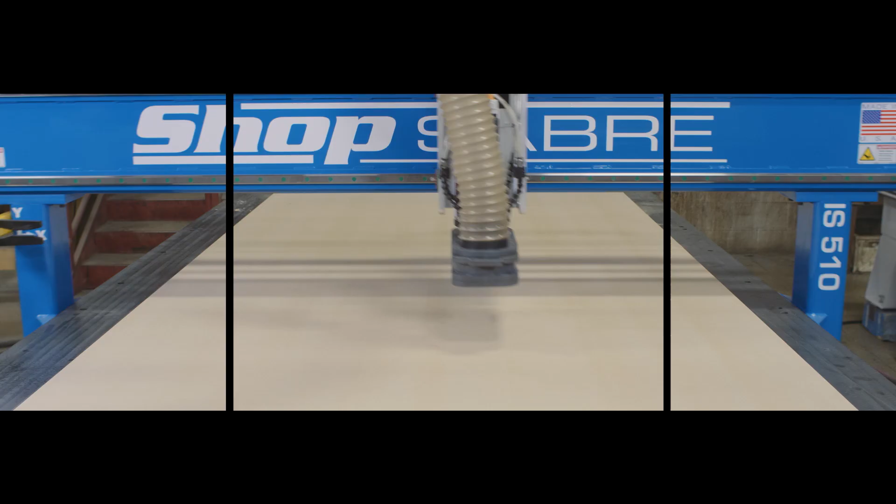Hi everyone, I'm Logan. I'm a technician here at ShopSabre, and we're going to head out to the machine and take a look at our ShopSabre controller.

First thing you'll notice on the controller is that all the axis letters are red. That means that you have to home the machine.

So when you hit the home button, which is located right here, the axes will start moving and it will go to find home. Now in this case, we're not at the machine. This is a demo version, but what you'll end up seeing when it's all done is that it'll move all the way forward, touch its limit switches. If you notice the little dots coming forward, it'll touch off its limit switches, back off to the home location, and it'll end up calling that the home position.

Right there. Now we can see the X, Y, and Z axes are all 0. At this point, you'd be free to drive the machine around, and you can do that using either the arrow keys on the keyboard, page up and page down for the Z-axis, or you can use these arrows on screen here as well.

And you can see if we try to go too far, it's going to give us an error, soft limit high Z, or soft limit low X, or high Y, whichever direction we try to go. So that means we've exceeded the cutting area on the machine. We can't go any farther than that.

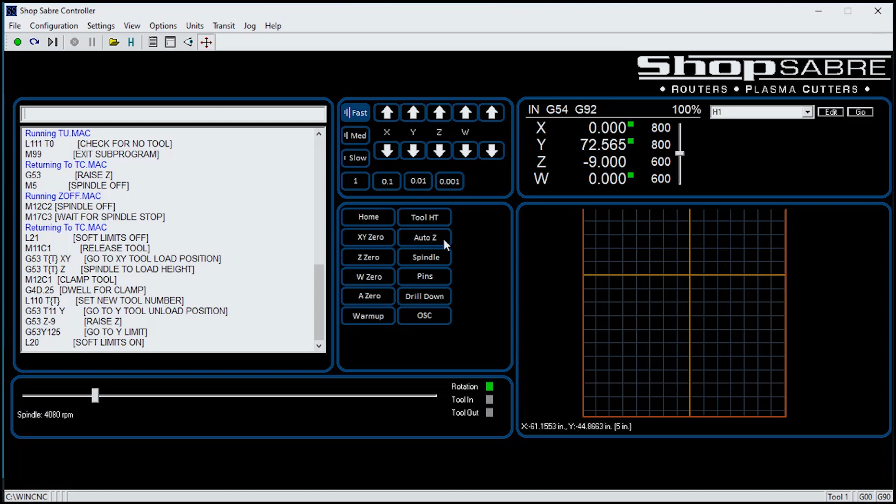The next button is optional, and you'll see it on machines if the material height touchpad has been purchased. If so, there'll be a plug next to the spindle. You plug in your material height touchpad, put it on the surface where you want to set your Z0, either the top of the spoil board or the top of the material, and hit the Auto Z button. The spindle will lift all the way up and then start coming down slowly.

While it's coming down, you'll want to line up that pad underneath the cutting head, whatever blade you want to cut with, whether it's an end mill or a fly cutter—just make sure it's under the cutting surface. It'll touch that twice; the second time will be slower for accuracy, and then it will lift all the way up. At that point, you can remove the material height touchpad, set it aside in a clean, dry place, and proceed with running the machine. Some folks consider it a quicker way of setting your Z0 rather than having to get up close to the machine to make sure your bit's touching the material.

The spindle button is just a way to turn on the spindle. So if you have a tool in there, it's going to spin on. In this case, we don't have a tool in there, so it's not turning on.

The pins button pops up your pop-up reference pins. In this case, we have a boring head, so a drill down button will also drop the first drill down. So when you're setting your W0 over here with the boring head, you'll press that button first, then bring it down and set your W0 with that.

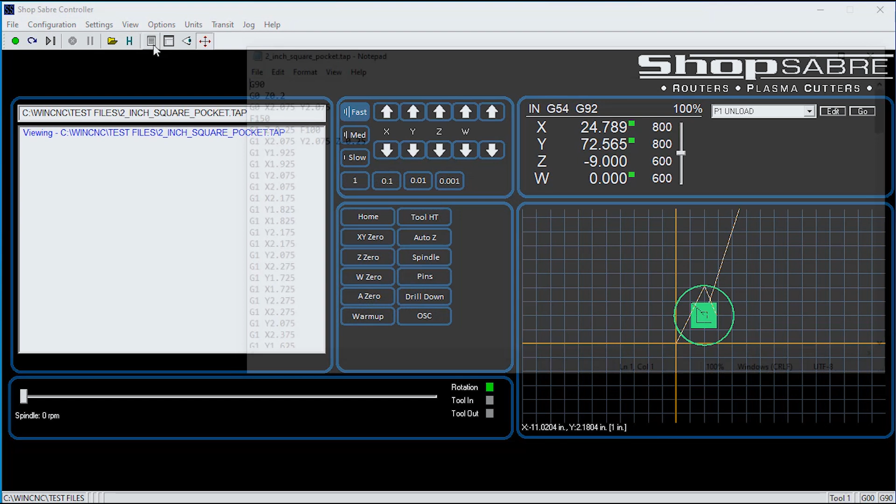The next button is the edit button. That's going to bring up the G code itself. I don't expect you all to be experts on G code by any means, but a couple things you might notice: the F is the feed rate. In this case, it's setting a general feed rate for the machine, but because this is a Z specific line, it's setting 100 as the feed rate for just the Z axis. So if you wanted to go back and change a feed rate quickly, you may not have to go through your camming software, you can just do it here. Or if you wanted to change just how deep it was cutting, you could do that right here as well.

The next button is simulate. It's going to run through the code and see if it finds any errors. In this case, there are no errors. If someone else gave you the code, or you downloaded it online, you can bring that up and check. If there are errors, it will tell you what the first error is and what line it's on. It'll also tell you if you're going to exceed any soft limits.

In this case, we're going to exceed the Z soft limits. So if we were to try and run this, it's going to give us an error, so we know we may have to adjust it. It's also going to give you a basic

estimate of the total time the machine might take. It does not take into account accelerations, decelerations, tool changes, tool measures, things like that. So it's a very approximate number, but it will at least give you a general starting point.

The next button is the view button. Some machines have a button here for soft limits, which you can turn off if you want to exceed them. We don't recommend doing that because you could cause damage to the machine if you go too far. So generally, you should just leave those on.

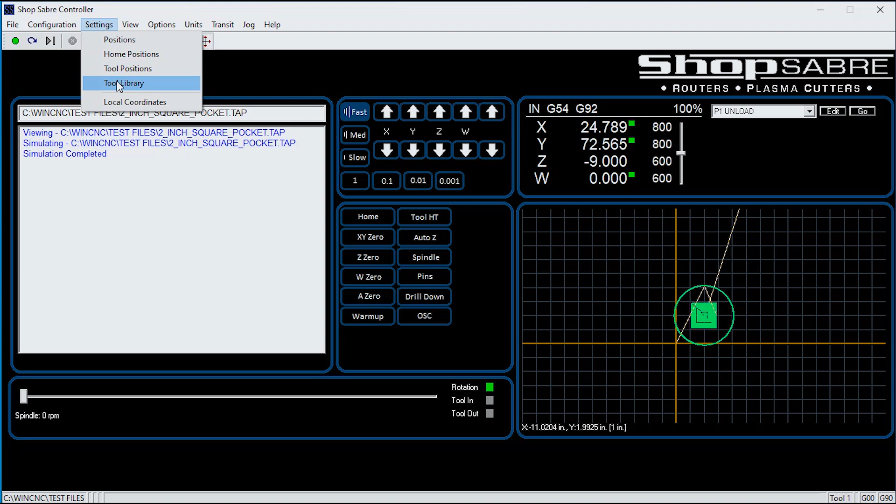Same thing with the settings menu. Generally, there isn't anything that has to be configured in here. If you end up upgrading, adding more tool positions, we might go into this box. In the tool library, you can put the name of which tool is going where, but generally the controller is going to ignore all of this except for a couple of specific situations, except for the tool height. When you do a tool measure, you'll end up getting a value in there for tool height.

Now under the view menu, again, most of this can be ignored. The limits will tell you how much cutting area you have on the machine, and the inputs will bring up all the raw input data for the machine.

If you were to hit a limit switch, you'd see one of these flash, and that's a good way to diagnose if maybe a limit switch needs repair, has a loose wire, or something like that. The toolbars can be made bigger, so if you need glasses, make them a little bit bigger there.

Log time totals - all machines for the last couple of years have this log time totals feature. It will bring up a box that shows how long the machine's been running, what the cutting time and total run time is. You can use that especially if you're keeping track of the greasing schedule.

Every 40 to 60 hours, we generally recommend greasing. The most important thing is that you have at least a thin film of grease on the rails. If you don't, or if you're doing something like foam that you have to keep wiping off the rails, you may want to increase that greasing schedule.

You can find out where the bearings are and how many bearings you have by looking in your owner's manual. The refresh and clear buttons do exactly what they say, so you hit clear and it just clears everything on screen.

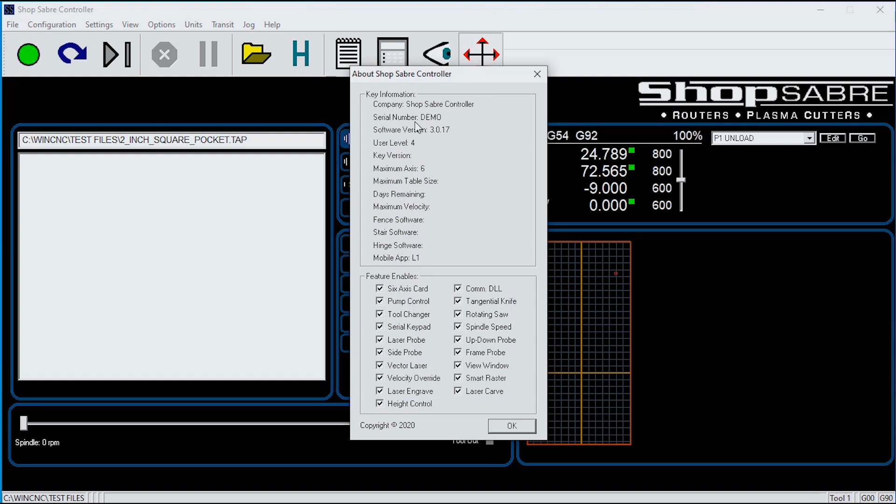First is About. That's going to tell you what software version you're running, what your serial number is, and what options you have enabled for your machine.

Also under the help topics, it's going to bring up the WinCNC manual with everything about how the controller functions. For the most part, you won't need to know most of this, but it does have all the G codes, M codes, and L codes that the machine can understand, as well as a couple pages showing all the shortcut keys for operating the controller. So that's all available through that menu.

Now let's go back inside and discuss drawing in VCarve. So now that we're back in VCarve, we're going to go through setting up a file and doing some basic drawing with included drawing tools.

The first thing we're going to do is click Create a New File. When we do this, the first thing that shows up is the job setup screen. In version 10.5 of VCarve, we have three options: single-sided, double-sided, and rotary. Primarily, we focus on single-sided. Double-sided lets you do a flip part, and of course rotary is a fourth axis.

So let's choose single-sided, and we're going to give a job size setup. This is going to be whatever size sheet you're working on at the moment—so if you have a normal 4x8 sheet, it's usually something like 49 by 97. The thickness is just whatever thickness of material you're working on, in this case 0.75 inches. And you can choose inches or millimeters.

The Z0 position is really critical to match both on VCarve and on the router screen. So the material surface or the material bed is either top of the material or the top of the spoil board, and that's going to be really important later on once we actually get out to cutting. So for now, we're going to choose material surface.

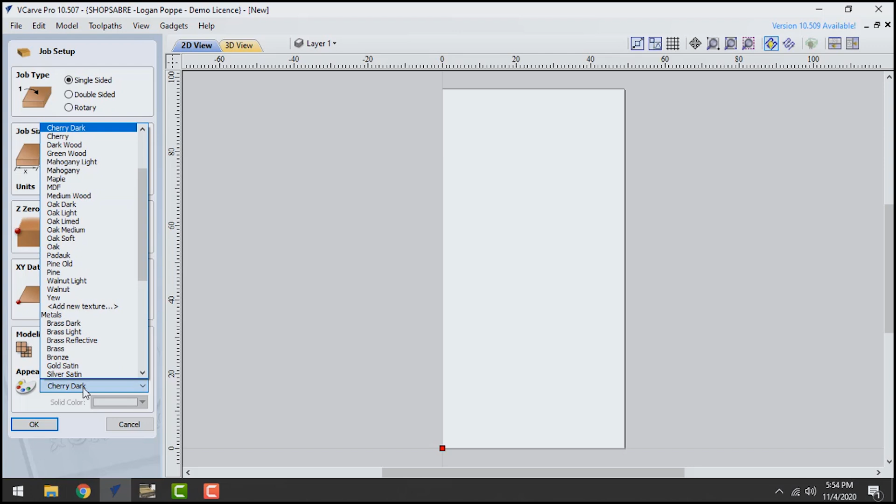Modeling resolution you can usually leave as standard to start with—you can always increase it later. There's also some other options in the toolpath to get even more accuracy if you need to see some really precise details. So in this case we're going to go standard, and the appearance is just for taking screenshots to send out to customers, so we're just going to leave it on cherry right now.

So we click OK, and on the left side are all of our drawing tools. The main things we're going to go through right now are how to create vectors under this Create Vectors tab. So we have Draw Circle, ellipse, rectangles, polygons, and stars. We have polylines, arcs, Bezier curves, and a few other things we'll get into in a minute.

So first we're going to draw a circle. To do this, you can either come over to the screen, click and drag, and you can see it reads out what the diameter is, allowing you to make the circle wherever you want and however big you want. But you can also be accurate if you know exactly where you want it to go. For instance, maybe I want to start at 0,0 and have a diameter of 6 inches.

Now you can see the last one I drew, since I haven't modified it yet, got moved down here, and it just applied the change directly to that circle. So as long as you haven't modified it, you can actually change it, scale it, move it, rotate it through this box.

So now we have our circle here, and we can zoom in using the mouse wheel. When you're zooming in, it's important to zoom in towards the part, so you put your mouse right in the center of the part where you want to zoom in and just zoom right in with the mouse wheel forward. When you're zooming out, you typically want to move your mouse away and zoom out, so you'll be able to see the whole thing. If you zoom in like this and then zoom out right here, it's going to try and focus around the mouse, and you may not see the whole part.

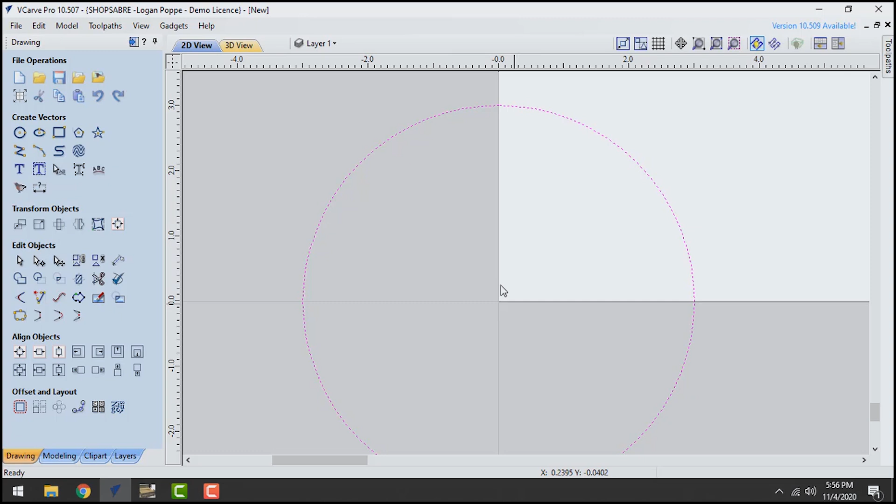Ellipses work very similarly, except that you're going to have an anchor point. In this case, I'm going to start my anchor point down there, and I'm going to go ahead and draw. You're going to give it a width and a height and apply it, and you'll get, just like the circle, an ellipse drawn on screen.

Now, rectangles are very similar as well. You're going to have an anchor point, a starting point, a corner type - I can have a square corner, radius internal, or radius external corners as well, and you can choose the size of that. For external radiused corners, those are what you might commonly call a fillet, and there's another tool to change that to be radiused later on. The internal radius doesn't have a specific tool for it, but if you haven't changed the rectangle or modified it in any way, you can come back into this tool and apply it later, and of course you can set the size and shape of it.

You also have a polygon, so you can come out here and draw different numbers of sides - pentagons, hexagons, etc. The center point, the radius, side length, it's all there, as well as star shapes, and again you can give it how many sides, how many points you want it to have.

Now, to select all these, we can draw a selection box from left to right, and anything that's inside that selection box will be selected. You can see it all goes with a dotted pink line. If I click off of it, it gets deselected. But in VCarve, there's also another way to select things: if you click to the right and drag to the left, anything that's touching will be selected. You don't have to surround the entire shape - right now these three shapes will all be selected even though I didn't surround them. That's a really handy tool, but it's also important to know it's there so you don't select things you didn't mean to select.

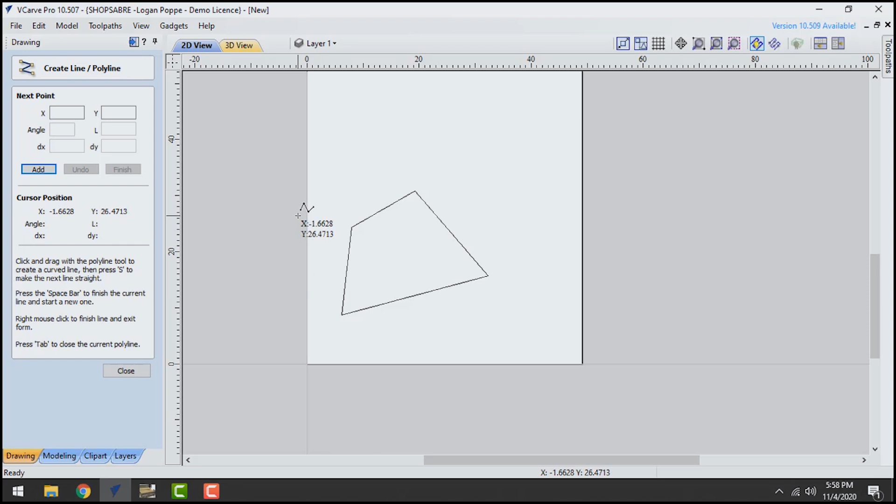But we can also just tell it exactly where we want it to go. So if I wanted to draw a triangle, I could easily do that here. I can click X0, Y0, enter, and it draws a line. Now if I move my mouse over, I've got my start point right there, so now I can draw 10 and 5, and it's going to draw a diagonal. I can bring this back to 0 and 5, and now I can bring it back to 0 and 0, and it's going to complete the shape. You saw it change color, and now I have a triangle.

I can do the same thing with a star shape as well. To get out of a tool, you just right click. So if I'm in a tool here and I'm drawing, I can right click, and it'll stop the tool right there and give me this particular shape.

But I can also give it a start point and change the angle or length as well. So if I knew I had a shape that had to have a diagonal exactly at 30 degrees and it's 5 feet long, or let's say 60 inches, it's going to give me that diagonal at that angle. I don't have to try and figure out and do the math where this endpoint is. And now I could either do up or down from there using dx or dy, or give it specific XY coordinate points. But if I knew I wanted to go from there 5 inches up, I can say dx0, dy5, and it's going to go straight up.

And then I can switch back to using my coordinate points if I know I want that to go to X0 and Y20. And then again, I can go back to X0, Y0, completes the shape, and now I have my finished shape.

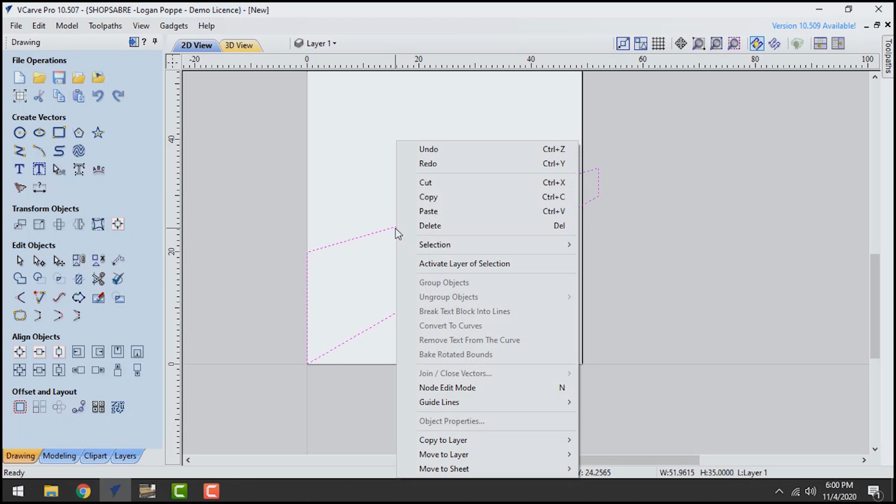I can use the delete key on the keyboard to get rid of a shape. Click that, or I can right click and click delete, and that gets rid of it as well.

Now, one of your biggest friends with VCarve is going to be Control Z. That's going to undo the last operation. So in this case, it brought that back, and it keeps several of them stacked up. So I can do Control Z, Control Z, Control Z, and it can keep going backwards if I want. Again, I can select right to left and delete, and delete.

Another tool that's used a lot is the Draw Arc tool, and this is used a lot, especially if you're tracing parts. There's two different options here. One is through 3 points, so you can click to start, click to end, and then drag out the radius. Or you can do a center start end where you click one point, click another point, and then you have your part of the circle you want to draw. Of course, you can set all these if you know the exact coordinates you want to go through as well.

VCarve does have a vectorizing tool, a tracing tool, and that's right here under Trace Bitmap. But sometimes, as we'll see later, it may not vectorize perfectly. And this is where we may use this Draw Arc to go in there and actually draw something specific to match a little bit closer to the part we're trying to trace.

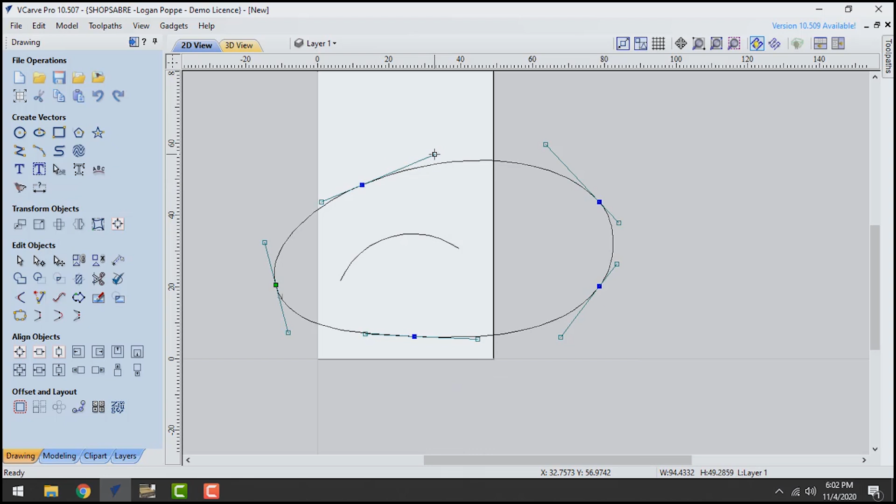We also have Draw Curve, and this is going to be our Bezier curves. So every time we click, we get a handle there, and it creates a curve going around those points. Now, if we right-click to get out of the tool, right-click again, we can go into Node Edit mode, and we're going to have all these different handles that we can drag around. This lets you get really detailed on making some interesting shapes that you couldn't otherwise make.

And while we're still in Node Edit mode, we can right-click and insert a midpoint or another point, or we can change a line to an actual line or an arc rather than just a Bezier curve. This works for all the different shapes as well, whatever tool you're in.

We could also cut the vector. So if we wanted to take a piece out of this, we can right-click twice to get out of the tool. And now when we select it, we see that just that little section turns pink. So I delete this, and now I have an open contour. Let's get rid of that.

The next tool is a vector texture tool, which we'll use here in just a minute when we start building things. We also have a Draw Text tool, where I can just type in whatever I want to say.

I can choose my font, and these are going to be all the fonts that are in your Windows Fonts folder. So if you want to add more, just find the Windows Fonts folder on your hard drive, drop them in there. Next time you open up VCarve, they'll show up. I would recommend using a true type font, and that's what you're going to see right here with these little TTs. Right here we have the letter O—this means it's an open type font, and they may or may not show up properly. So ideally, always try and find a true type font if you're adding new ones. And you can also give it the text height.

Now the text height is, when someone's making a font, the total blank area that they have to draw with. So for instance, 8 inches for text height is going to be maybe where this H or these L's are, but the E isn't going to be 8 inches tall. That's the blank area it has to work with for a particular character. So keep that in mind as well.

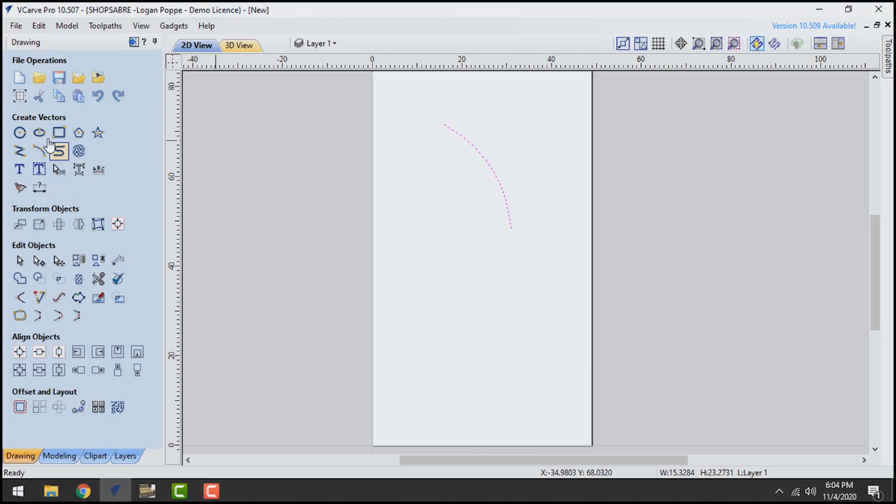There's a couple more text tools, which again we'll get into in a little bit here once we start drawing. There's also text on a curve, and it doesn't necessarily have to be an arc. So let's bring this back out here and say I wanted to put my name on there. I can choose text on a curve and select both of these.

In this case it's a little bit too long, so we can shrink it down, scale that text down, and as soon as we do that it shows up on this curve. Now we have the options to move it out onto or on the other side of the curve. We can flip the text around, change it to be left aligned, middle, right aligned, or aligned to curve, or keep them vertical, which will then align them with the vertical axis here, but still follow that curve.

And if I go back, of course, it gives me that error, so then it automatically flips back to scale text to fit the curve. And it doesn't just have to be this arc. I can have any kind of crazy winding shape that I want, or a rectangle box. It will make it follow that shape.

All right, now let's go ahead and actually draw something. So we're going to first draw a rectangle. Let's say we want to make a plaque with our name on it. We choose rectangle, and we're going to start with an anchor point at the lower left corner at 0, 0. It's the best practice to always start at this lower left corner.

If you have a particular shaped remnant and you want to put it in a specific location, that's maybe when you would change it. But for now, we're just going to start at 0, 0. And I want these internal radius corners so it looks like a really sharp, nice looking plaque. For size, let's say we're going to make this 15 inches by 10 inches, so we put in 15 by 10, say create, and it puts our plaque down there. That looks pretty nice.

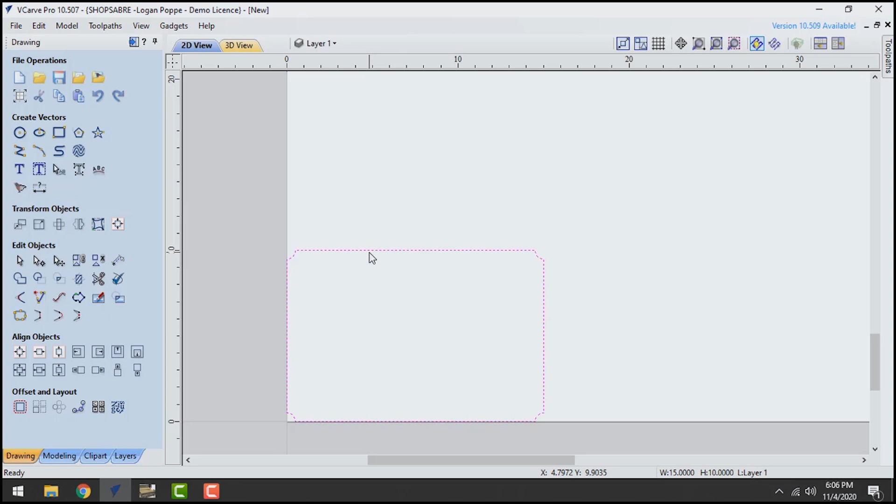One, I could go back in here and draw another rectangle with a slightly different size radius corners and a slightly different size and anchor point, but that would be a little bit more complicated. And like anything you do in VCarve, you're going to find that there are multiple different options. I could also do a copy and paste. So if I do a Control-C on the keyboard and a Control-V, you see now these lines got darker. That's because it pasted a second object right here.

So I could go into the Scale tool, set selected size, anchor point of center so that it collapses around it, and change this size to be slightly less, say 14.5. But as you notice, it scales both the width and height together. So instead, what I'd really want would be to uncheck Link XY, and now when I change one of them, it's not going to change the other. In this case I can make it 14 by 9, hit apply, makes this smaller, and I could realign it with the center right here. But as you can see, this isn't quite right.

Maybe that's the look I'm going for, but in this case I want something that changes that curve as well. So the easiest tool in this case is your offset tool, way down here at the bottom left. I'm going to offset inwards — I have the option to go outwards or both — and I want to inset by half an inch. And I don't want to delete the original because I want to keep that as my outside border.

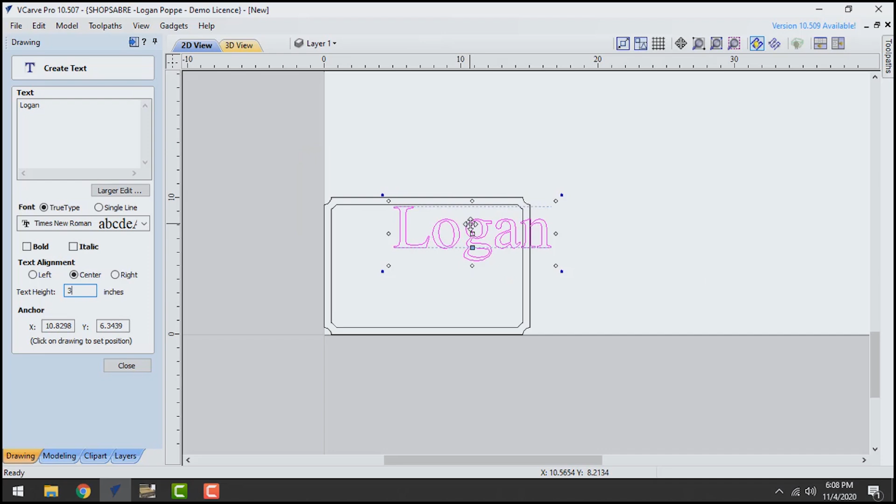One way of doing it, again there's always multiple ways, is I can come in here and change the text size, get it to fit, and drag it into the center. VCarve, if you have these snapping tools on up here, will tend to allow you to snap to things. So in this case, snapping to the center of the box brings it right there. But you can also see that the G is off a little bit, so I may want to bump it down, and I can use the arrow keys just to bump it down a little bit.

In VCarve, the closer you zoom in, the less that bump is going to affect it. When I zoom way out, it's going to create much bigger jumps. If I hold the Control or Shift key, you can see those jumps change size significantly, and those are always going to be the same size regardless of the zoom level, unlike the regular bumps.

But there's another way to do this as well, and it's right here under Transform Objects. We can go to Align Selected Objects, and you have all the different tools. I can align to a specific shape or to the center of the sheet. And all the way down here on the bottom, it says Show Common Tools on the Drawing tab. Now when I click on that, it brings out all those tools right down here, so it's easier to use.

So now I can just come out here, select the two shapes that I want, and click Align. And you see, because of the order I selected these, it moved the name right to the center. If I had selected in the opposite order, it would move the box to the name.

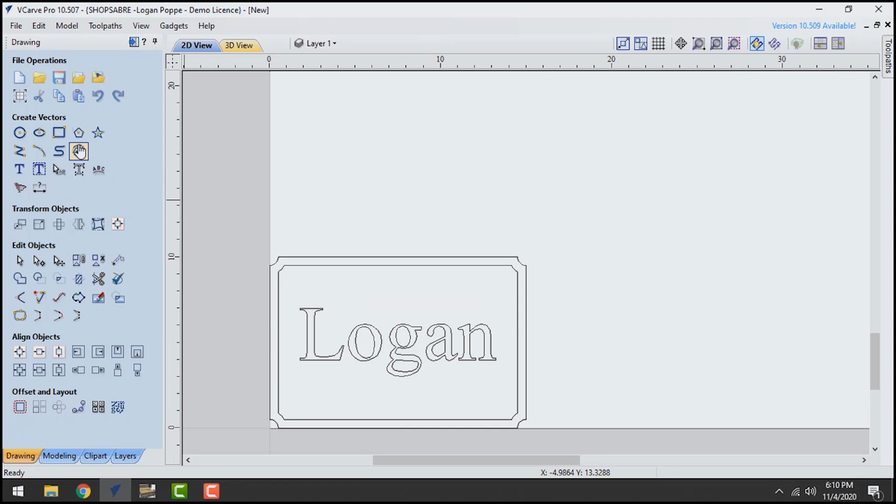So now that that's done, I want to put some kind of fancy texture in here, and that's where I'm going to use this texture toolpath, vector texture. So I'm going to click the inside inside rectangle, and I'm going to choose my angle, my spacing, which can have some variation to it, wave parameters, how much variation there is with the noise, and hit preview.

And it's going to keep these lines inside. You'll be able to see they go right up to the edge, but they go on top of the name because I didn't select the name. In this case, if I'm doing something like V-carving the name down into the plaque, that's probably how I want it. I want the bit to spend the most time cutting the material. It's going to save me time overall. And then I'll carve this out after that.

However, if I wanted to keep it in between the name and the rectangle, I can select both of them, do this, and hit preview, and it's going to keep that texture outside of the name. Now in this case, I really just want it to be around there, so I'm going to click OK, and it's going to fill that in.

And perhaps I want a couple of drill holes as well. I'm going to choose draw a circle and choose a 1/4 inch diameter or whatever size drill hole I want in order to hang the plaque. And I'm going to choose where I want those to be. So I could go out there and just click a spot, or I could click, say, 2 and 9. And now I have my one drill hole.

Now, since this is a relatively easy shape, I could just go do the math and say, well, we're 15 minus 2 would be 13. And we have another circle right there. But if it was a more complicated shape or I didn't necessarily have the coordinates down, there's another way to do it as well, which is mirroring.

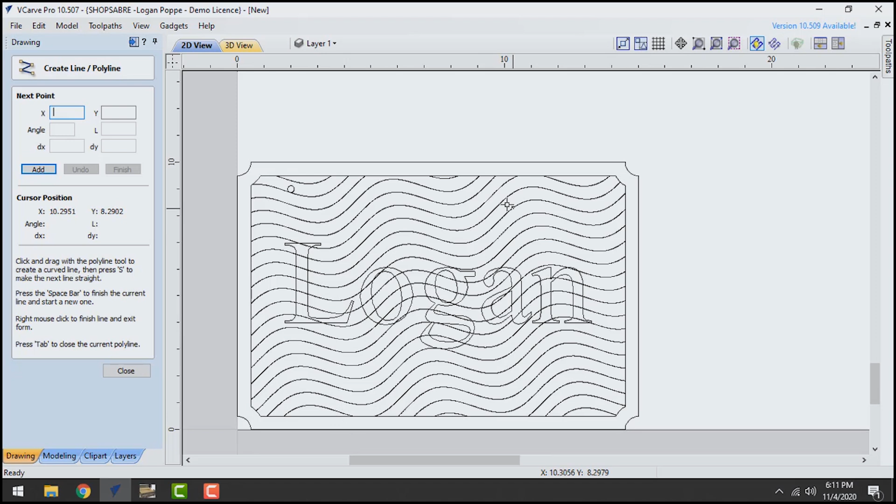So one way I can do it is I can draw a line straight down the center of my part. I can take those two pieces, come into the mirror tool under Transform Objects, make sure that Create a Mirrored Copy is checked, so there's a second one and it doesn't just move it. And then I can click Flip Right, and now we see we have a second copy right over there that's exactly mirrored from this one.

That can come in really handy when you start doing more complex shapes. And then I can just select the line and delete it, and we're good to go.

Now I'm going to start putting toolpaths on here, because of course I want to actually cut this. So we're going to come all the way over to the right side and get our toolpath menu. And I like to hit this little auto hide button, this pin icon. It keeps it out so it doesn't keep moving around on me.

So now I want to think about the order that I want to cut this. Of course, the very last thing I want to do is cut the shape out. But in between there, I want to create that pocket. I want to cut the name out, put this texture on, and then also drill those holes.

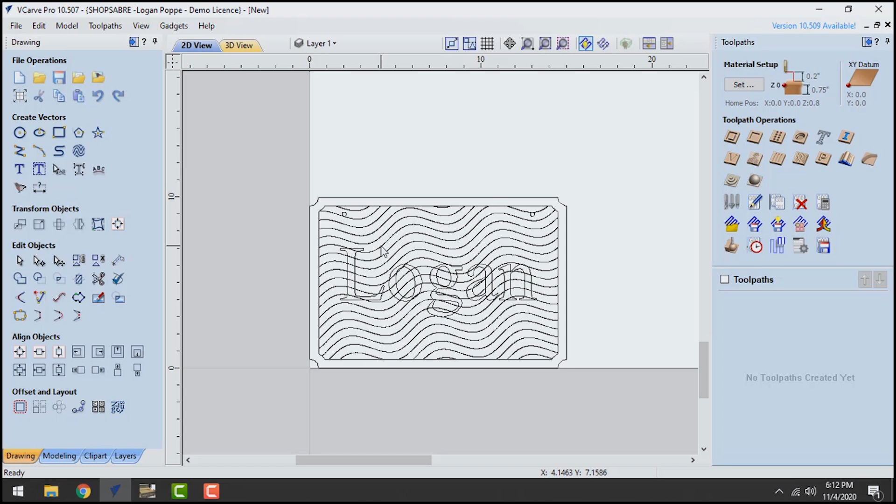So the first thing I'm going to want to do is cut that pocket down in there. I'm going to come over here to the second option, which is Pocket Toolpath. In this case, my start depth is going to be 0, and normally, for most of your toolpaths, it will be 0. My cut depth is how deep I want it to go—in this case, a 1/4 inch. And I'm going to choose my tool.

These will all be selected when you first set up VCarve. You're going to come in here and in your tool database, set up all your tools. In this case, we have a number of them already set up, so I'm going to choose my tool, and all these parameters should be set up. But if I wanted to change them only for this toolpath, I can click the Edit button and fill in all this data here. So say instead of 200 inches a minute, I only wanted to do 150 inches a minute for this particular run—I could do that, and it won't change what's in my tool database.

Then I'm going to choose which type of pocket I'm going to do, either offset or raster. Offset's more like a spiral where it will start on the inside and work its way outside, whereas raster is going to go back and forth, and generally you're going to choose the longest direction when you're doing that. So in this case, I'm going to choose 0 degrees, which is left to right, whereas 90 would be lengthwise down the machine. And I'm also going to do a last profile pass, and this is going to come around the outside and do a cleanup when it's all done.

Now the next option is ramp all your plunge moves. And you're going to do this on any down cuts or compression bits. It's absolutely critical that those bits are ramped in, not plunged, because they will burn the material. They have the potential to start a fire, or at the very least burn out the bit early from the excess heat. I tend to ramp in at least twice the distance I'm ramping down. So in this case, I'm ramping down a 1/4 inch, I'd want to do at least a 1/2 inch. I'm going to choose 1 inch because we've got plenty of space here, so it's not going to hurt anything.

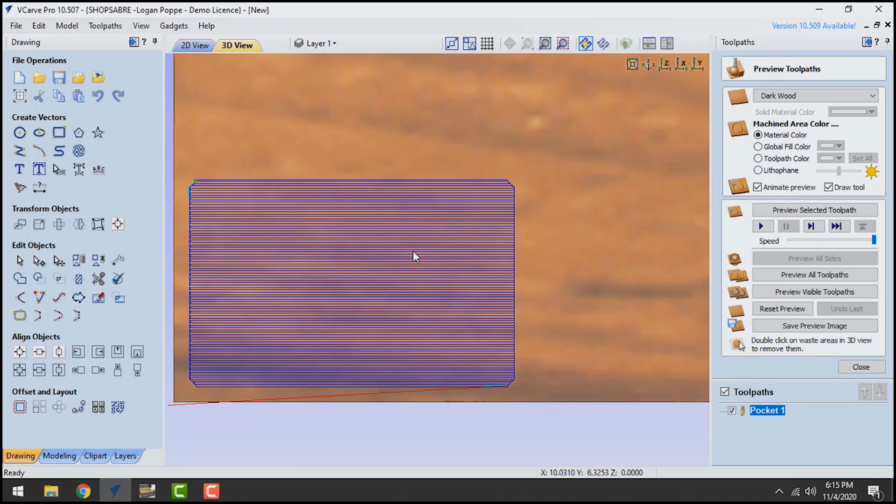Now back in the 2D view, I'm going to turn off that toolpath so I can see everything clearly again. And the next thing I wanted to do is do these texture lines. I'm going to come back up here to Profile, and I'm going to configure this.

This would be one of the few cases where you do have a start depth, because we already pocketed out this area. So we want to start a 1/4 inch down, the same depth we pocketed out. But our cut depth then is going to go down from there—this is not a total depth down, this is only the amount you're going down below the start depth. So in this case, I only want to go down a small amount, like 40 thousandths of an inch.

I'm going to choose my tool, same as before—in this case, I'm going to choose the V-bit. And one pass, because it's not going very deep. I'm also going to choose on the line. Outside and inside will offset the bit left or right, but in this case, I want it to actually follow directly on this path.

For this particular toolpath, we don't have to worry about any of these other options, and we'll come back to those later.

So now we have that toolpath, and we can go back up to 2D view, deselect our toolpath, and now we can cut our name, come back to close.

In this case, we're going to do a V carving. Now, a V-bit can be used in two different ways. You can do a profile just like what we did there, or you can do a V carving. The V carving is going to make the lines of any closed shape come to a V groove, a V shape. So if you have a 90-degree V-bit and you have a box separated by, say, 6 inches, it's going to try and make that a 3-inch deep cut to make those two lines hit a V.

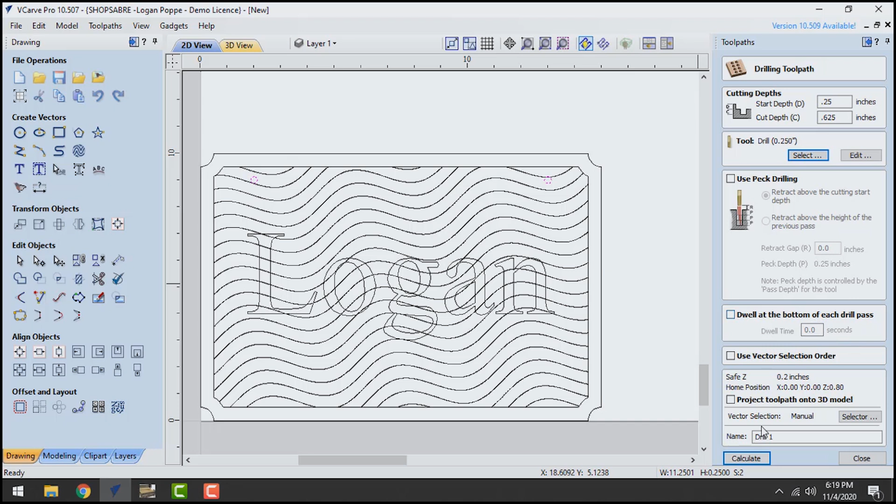And dwell at the bottom of the pass will allow the drill to sit and spin at the very bottom, just to make sure that it's all the way through in clearing the hole. We hit calculate. Now in this case, it's telling us that we're going to go all the way through, which is fine.

The next thing I want to do is put a chamfer toolpath around the outside. But there's a couple different options. With version 10.5, they actually have a chamfer toolpath specifically. But because we have a big enough V-bit here, we don't have to use that. We can actually just plunge that V-bit and run it around the perimeter.

So we can come in here and profile. And in this case, our start depth is 0. We're going to start at the very top. And we're only going to go down about 1/4 inch. And again, we're going to choose our tool. And we're going to check on the line.

In this case, it was already set up. It remembers the last settings that we used. And now we just get a profile line right around there.

Come back and do one more, and this time we're actually going to cut it out. So we still have our outside selected. We're going to choose Profile Toolpath, only this time we're going to be cutting all the way through.

And if you have vacuum hold down, you may be able to get a very accurate number here. If your material is 0.75, you may be able to go 0.75 or 0.76 or somewhere in between. If you don't have vacuum hold down, if you're just using clamps, a lot of times the material will have a bow to it. So you may end up going with something like 0.77, 0.78. It's going to depend on your material, of course.

For the tool, in this case, we're going to choose our compression bit. We're going to choose outside so that it offsets that tool. We're going to ramp it in, and in this case at least 1.5 inches. We've got plenty of space, so 2 inches is fine.

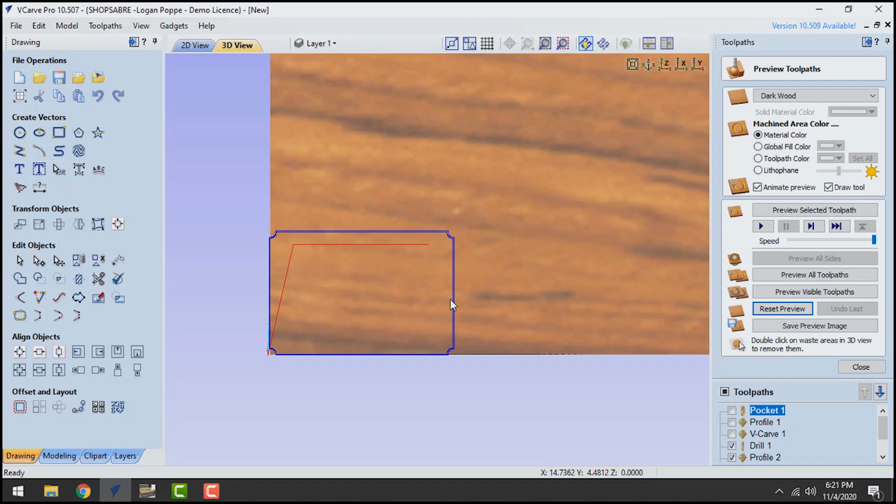We're going to calculate, and again, we're cutting all the way through. Now we can preview it. There's a few different preview options. We have preview selected, which is whatever is highlighted in blue. Preview all toolpaths is whatever's in this list. Preview visible is whatever's checkmarked. And of course reset, if we previewed it once and want to clear it all out to make a change, we can do that. In this case, I'm going to preview all.

Once it's previewed, we can double click on the material, anything that's left over, and it'll get rid of it. Same thing down here. So now here's our finished plaque. We can left click and tilt it to see it at an angle.

You can see in here this is because we didn't use a clearance tool, so we're trying to clear out this area with our little V-bit. So if we have a 1/8 inch bit or a 1/16 inch bit, we may come back and clear that up. That'll probably save us some time as well.

But we can also see that around the outside here, our V-bit's cutting into the edge of our border, and we don't really want that, or at least I don't in this case. So what I'm going to do is come back here and offset this. I could do a scale object size, just like we did before, or I could offset this border again and do another toolpath on there.

In this case, I'm just going to offset this. So I'm going to change the set selected size, again uncheck linked XY, and move it in a little bit depending upon the size of your bit. If you have a 1/4 inch bit, you may not have to move it as far. Let's say in this case I do 13.5 and 8.5. We want to make sure we're on the center so the whole vector texture stays centered.

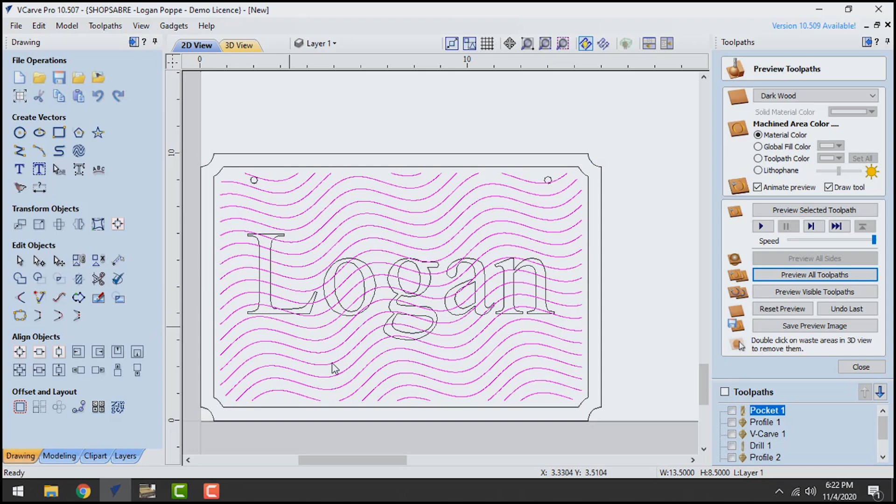You can see it offset it from the side. We can come back here, right click, and choose recalculate all. It goes through, yep, we're cutting all the way through. All toolpaths successfully recalculated. Come back to the 3D view, reset the preview, preview all toolpaths again, and we'll see if that got it away far enough.

And that looks pretty good. There is a little bit left here, so we may decide to come back and tinker with this a little more, bring this in maybe another 1/8 of an inch on each side. Overall, that's looking pretty good.

So in order to get this out to the machine, we're going to come back over here, close, and click Save Toolpath. Now in this case it will depend on what type of machine you have and what options you have with your machine as to exactly how you're going to proceed. If you want to put all visible toolpaths to a single file, you'll want to have either a tool changer, automatic tool changer machine, or have all of those toolpaths be the same tool.

In this case, we have different tools, but we also have a tool changer, so we can just select all of the tools. What it's telling us is that both of these toolpaths are using the same number tool, but the actual tool is different. So what we can do is come back to Profile or Drill, Edit, and change this tool number.

Now, of course, once you set this all up for what's on your machine, they should all be in the correct order and you won't get that error. But now that we fixed that, we don't have any more errors here. We just have to remember now to move our drill to the tool we just changed it to. We can click Save, and we can come in here to today's date.

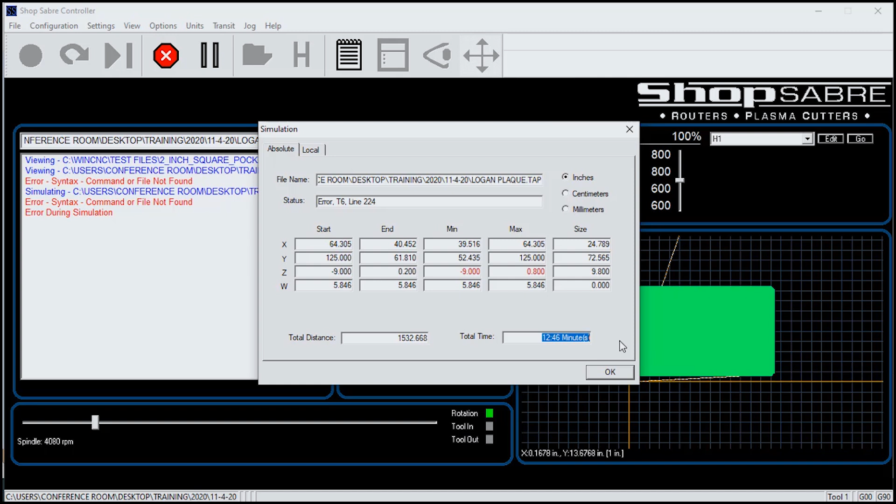Keep in mind this does not include accelerations or decelerations, so if we're doing a lot of little details, it's probably going to take a little bit longer than this. But that gives us a good estimate for what it's going to be.

If we don't have a tool changer, we're going to save these separately and run them successively, one file after the next. So we can click a single one, and we're going to choose our different post-processor. Instead of ATC speed, we're going to choose our M5 speed.

We're going to click Save, and we can give it the name. In this case, I would call it Logan Plaque 1 and 0.25 end mill. What this is going to do is keep it in order when I look at it in the file folder. We're going to have toolpaths 1, 2, 3, 4, 5, etc.

And we're going to see which tool it is, so if I come back to this six months from now, it'll actually tell me which tool it is. But VCarve 10.5 has another function where you can say save visible toolpaths to multiple files and group where possible. So because these two toolpaths right here are both using a V-bit, it will automatically put those two together.

So if I select all the toolpaths and say Save Toolpath, and click Save, now in this folder we have exactly what we're going to do individually. So Logan plaque 1, 2, 3, 4, 5, and 6, and it combined 2 and 3 into 1. The only thing is it doesn't put what the tool is, but you can also change the name right here.

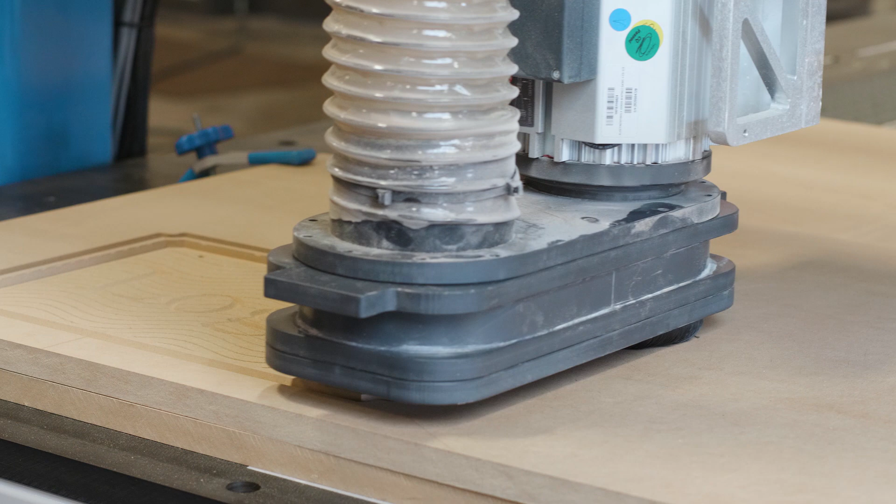Now that we've made a plaque, let's see if we can nest that out if we want to make multiple plaques. So we're going to go back to the 2D view, and there's several ways that we could put this across the whole sheet. One way, we can just select all of the lines that we have drawn, deselect our toolpath so we can see it, and we can do an array copy.

And what that's going to do is give us a certain number of rows and columns of whatever we've selected. So in this case, let's say we want to make 3 rows and 3 columns. We just want 9 of these. And we have to choose, do we want it offset or gap?

A gap would be how much space is left between the two plaques, and an offset would be from, say, left edge to left edge. So we're going to go with a gap. And generally, the gap between parts you want to be more than twice the diameter of your tool.

The reason being that you want your tool to be able to grip on the material on both sides so you don't get excessive vibration. So if we're using a 1/4 inch tool, we would want something more than a 1/2 inch wide.

So in this case, let's say it's 0.51 and 0.51. And all we have to do is say copy. In this case, the computer is going to go through, and that happened pretty quickly. It replicates all of the lines that we drew out here.

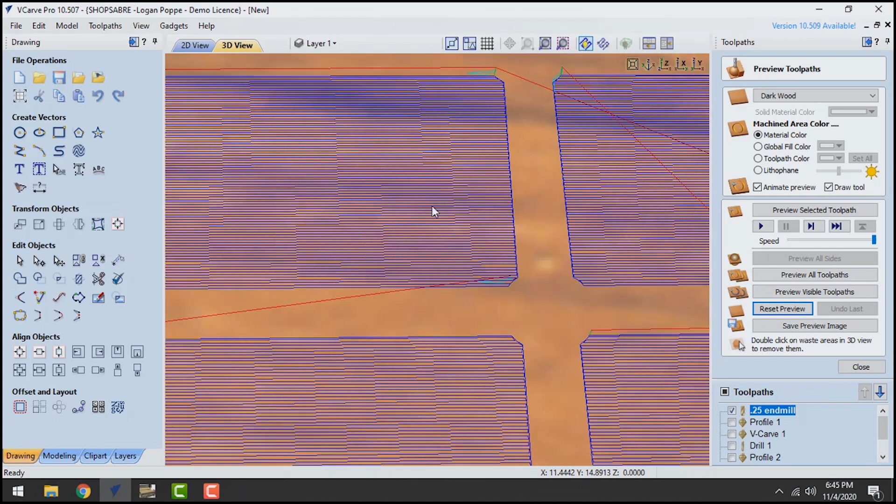We can reset the preview, and they're all right here. We could go through and do that with all of these different options. So that's one way of nesting, just creating a simple array of parts that fit on the sheet.

However, that is a lot of work to have to go back through and grab each individual vector and re-toolpath it. So there's an easier way to do it. What we can do is come back in here. In fact, let's delete all these parts. Computer's just thinking on it here.

There we go. We'll grab all these toolpaths again, and we're going to come back up here to change this to be only this one rectangle, since we got rid of the other ones.

There's an option for array copy toolpath, so all of the selected toolpaths will be arrayed out just like we did with array copy vectors, except it's only putting out the toolpaths rather than the entire vector set. It makes it faster—you saw the computer calculate a bit faster—and I don't have to go through and select every one over and over. It makes it a lot easier.

And of course, we can preview all of these, and we'll get our whole sheet there.

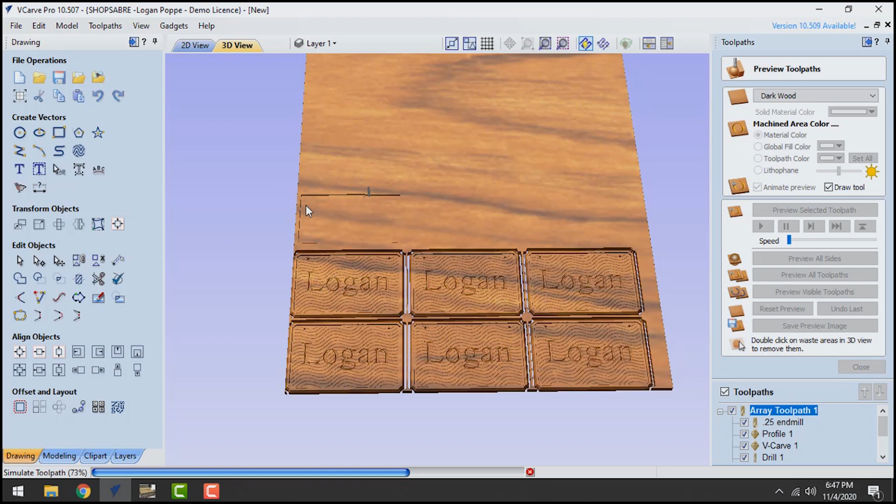The speed this goes at depends on two factors. One, this speed slider bar right here—if we bring it all the way to the left, it's going to go at real-time speed, so you'll see it slowly move back and forth if you wanted to watch that and make sure it's going the right speed. But we can also speed it up, and the maximum speed will depend on the computer processor you're running this on. The faster your processor, the faster this will preview.

The other factor is the preview simulation quality, and in this case I have it set on maximum, so this is going as slow as it possibly can. We can bring that back down to standard and preview all, and it goes much faster, as you can see. We'd only do that if we don't necessarily care about seeing all the detail—it's much more fuzzy because it's not trying to render all that little detail. So now that we know it works, we can speed everything up quite a bit.

So that's one way of nesting all the parts. However, some parts aren't necessarily as simple as a rectangle, and there's another option here for nesting. What this will try to do is rotate all the parts to fit them onto your sheet. You can give it a different rotation step angle, the gaps between the material, and how many copies you want, and it will try to put all of those onto a single sheet.

Now in this case, nesting won't do much because it's just a simple rectangle.

So before we move on, let's save this. We already saved the toolpaths. We're going to come back up to File, Save As, and give it the name Logan Plaque. This is actually saving the VCarve file—if we wanted to come back and make changes later, we'd have to have this file, because the G-code file can only be read by the machine.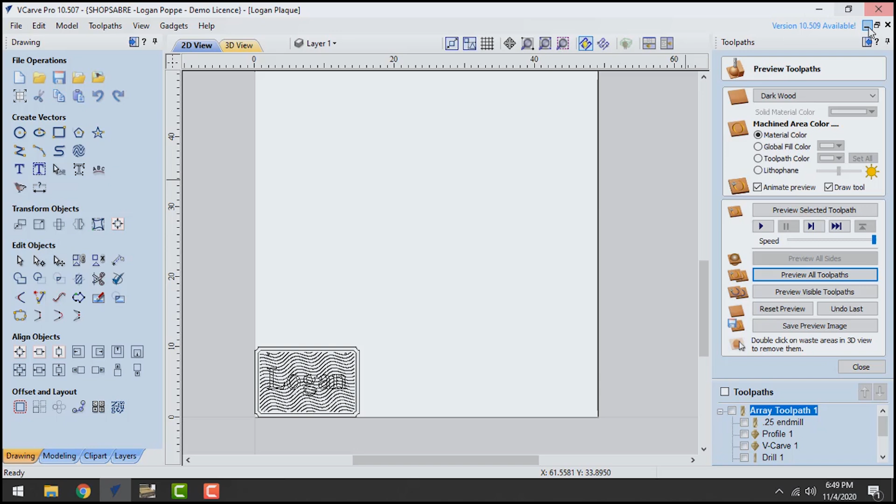So let's start a new file and just make an interesting little shape, something that's going to nest a little bit easier. I'm just going to draw a little circle there and maybe a couple little points, and let's even say just a rectangle—something that's going to give us an interesting shape.

We can use this trim tool, as you saw me grab right here, and it takes away any extra pieces that are intersecting. So when I grab trim, come back up here, click the part—in version 10, you can actually just click and drag, and anything you touch will go away. Again, Control Z is your friend—so undo that, and there we go.

Now this is all one part. Of course, we didn't do this little part here, so let's click that. Right here there's an option for rejoin trimmed sections. When I click this, it puts all of this together in a single shape. When I click on any part of it, the entire thing is selected.

If I didn't have that checked, I would get individual pieces that I would then have to check and join together. So let's say I did that, let's say I uncheck this. Now I've got two separate pieces here. How do I get them together?

Well, there's a tool called Join right here under Edit Objects. So I can select everything, Join, and in this case I'm seeing two open vectors, so two non-closed shapes. When it's all done, it's going to create a closed shape. Now in this case, because they're touching, we can keep this tolerance very low.

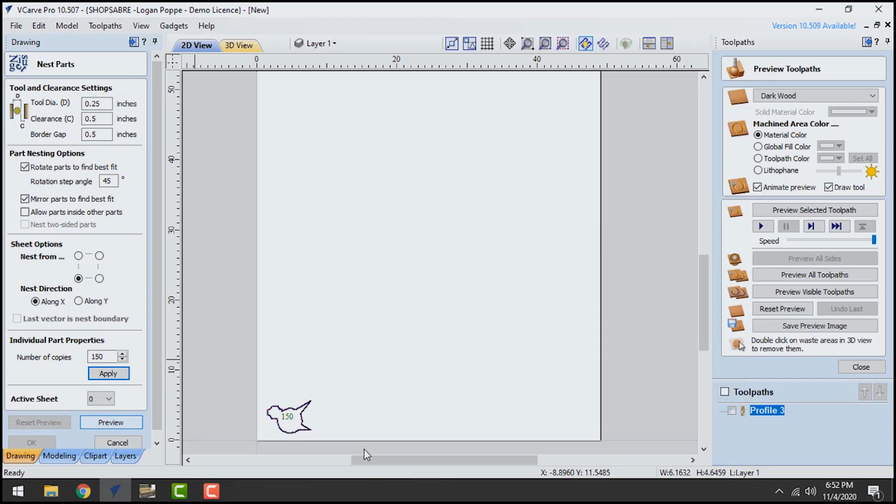Let's just say 150 copies. Now it puts a little 150 there, and when I hit preview, it's going to fit them all into a sheet if it can. In this case, it can't. We have an extra sheet.

If this was the exact number I wanted, exactly 150, I can double click on sheet 2, I can put my toolpaths on here, and then I'm good to go.

However, if I didn't want that many, I just wanted as many as I could fit on a sheet, what I can do is try to get this number a little bit closer. So I can reset, change this down to say 125, hit apply. Those all fit on one sheet, but I might be able to fit a few more.

So let's say 135, preview. And now this gives me 3 extra here. So now I can try changing my rotation step angle. Let's go down to say 22 degrees, reset, preview, but 22 actually got worse, there's more parts left over. So let's say I go down to 10 degrees, preview, and it's somewhere in between.

And let's try 3. And now 4, we're close. I can go back down to 2 and preview, and that went back up to 5. So there's no perfect number to start with. In this case, 45 got us the best, we only have 3 left over.

So I can come back in here, change this down to 132, preview. Yes, I want to apply that. And now I've got 1 full sheet of nested parts.

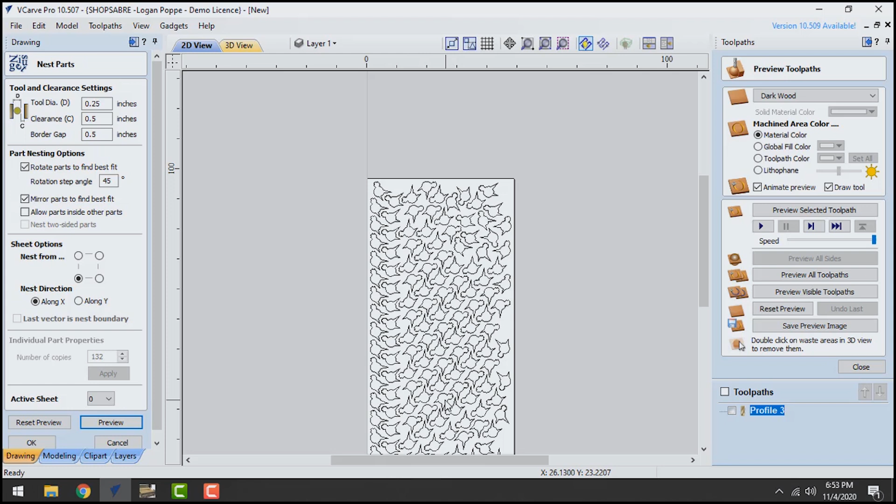Now in this case, this is a relatively simple shape, so I could simply go into my toolpath, do a Control A. Control A is select all. There we go, now I've selected everything and I can hit calculate. We're cutting all the way through. Now we have a nested sheet, and I can preview it and get rid of the extra, and there's all my parts.

Let's say I wanted to send this to a customer. There's a save preview image right here. If I click that, it gives me an option to save it as a JPEG or a bitmap or PNG. So I can choose one and give it a name, and now I could send that file to a customer so they could approve it.

And I can also change what color the material is or what grain it has, whether it's metal or plastic or wood. That's all in that option right there.

Let's say if we had a more complicated part, something where maybe we couldn't just grab it all at once. So let's put a few different options in here. Let's say we have some kind of shape there and we have some other shape over here, and we have different tool paths for each of those shapes. We're going to grab, say, a pocket tool path, and go down 1/4 inch in there. Then we're going to come back here and do a V-carving in this.

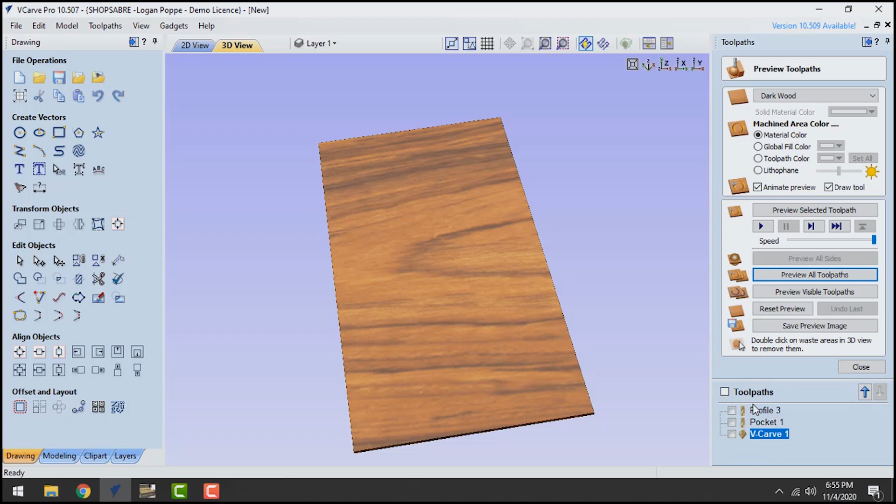We're going to reset the preview, preview all. In this case, we didn't recalculate our first tool path, so we're going to recalculate all. One or more errors have occurred, and what that means is we didn't select this option after we undid everything. So we're going to come back here, select this, calculate, and now we can preview all. We're back to our single shape.

All right, so now if we wanted to nest this, we could certainly do it the same way. We already figured out those parameters. We're going to grab all of these, and this would be one of the few cases we're going to group something. We're going to group it all, and that's going to keep all of the pieces together when it lays it out on the sheet, rather than trying to fit these individual parts inside of each other.

So we're going to nest it. We already have our number from before. Apply, preview, and they all fit on the sheet. But if I wanted to toolpath these, I would have to go through and select all of just this one, and that's not going to work out very well. So there is an easier way.

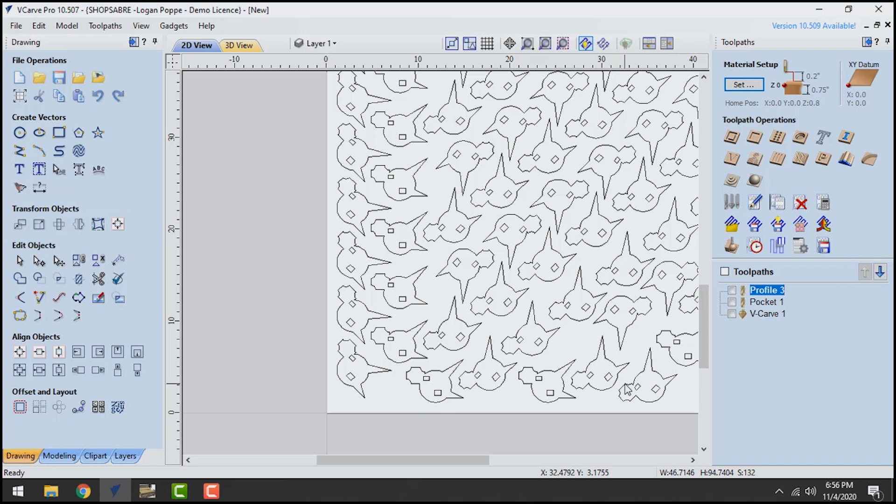First, though, I'm going to ungroup these, because if you notice, when I come in here, none of these are selected. That's because they're grouped, so they're not considered to be on any particular layer. So I can select everything, ungroup, and what I'm going to do now is actually undo everything before I nest it. Again, Control-Z is undo.

And I'm going to change the layers that these are on. So I'm going to do move to layer, new layer, and I'm just going to call this the border layer. Okay, and I'm going to choose this and say move to layer, new layer. I'm going to call this the VCarve layer. And up at the top here is your layer toolbar.

So we're going to turn off the other layers. We can turn on one or both, and this lets us toggle between them. Whichever one is selected in bold, that's the one we're actually drawing on. So if I were to draw something new, that's the layer it would be on.

Now, when we do our toolpaths, we can choose Profile 3. We come all the way down here to Selector, and we're going to choose everything on the border layer. Calculate that. Pocket 1, choose our selector, that's going to be everything that's on layer 1. And VCarve, that's going to be everything on the VCarve layer.

Now for just one part, that was maybe a lot of extra steps. But when we go through nesting this, again, group it. And when you group it, it pulls everything back onto the first layer. We're going to nest it, 132, preview, okay.

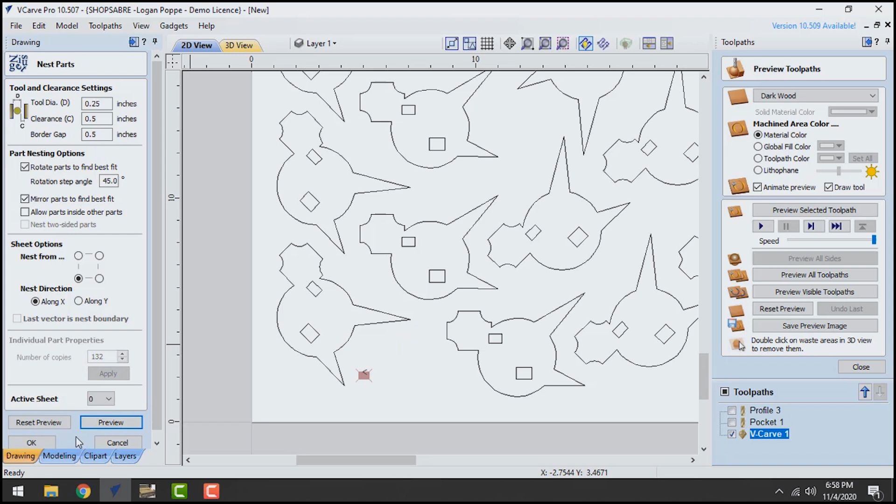And now we're going to select everything, again, Control A, and we're going to ungroup everything. Now we can recalculate all the toolpaths, and it's going to give us a toolpath for all of these. Now it gave us an error, so we just have to go through and figure out what that error is.

In this case, we should be choosing everything on the border layer, so that's all of those items. Calculate, we're going all the way through. We're going to click Pocket, select everything on layer 1, which now those are all highlighted. Calculate that. And VCarve, select everything on the VCarve layer, calculate it, and it lays everything out.

So in this case, it really just needed to be reselected. We can go back into the preview, reset, preview all, and now it lays them all out on the sheet, and I didn't have to go through and select all of those individually, and it saved me a ton of time. Of course, now when I'm ready to save it, I just come back over here to Save Toolpath and output it just like we did before.

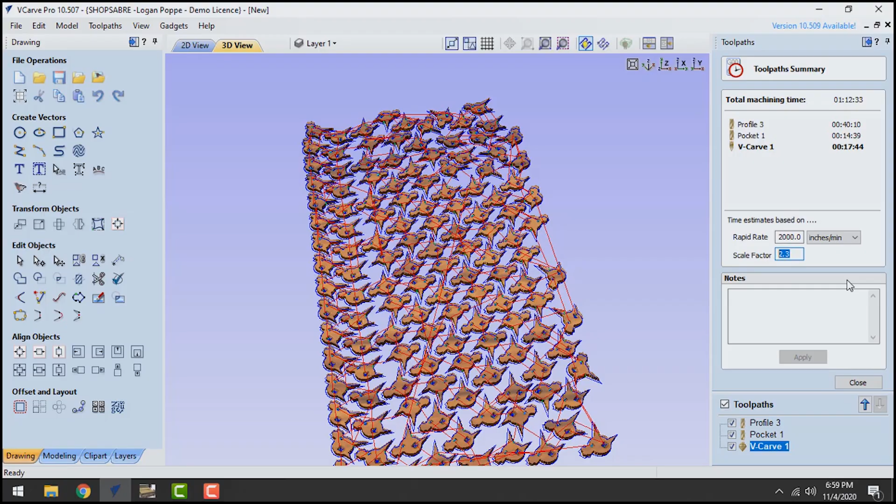There's also an option right here for a summary of all toolpaths. And what this is telling me is that at these particular speeds, it's going to take 1 hour, 12 minutes and 33 seconds to complete this. Now again, that does not take into account accelerations or decelerations, or tool changes. So what VCarve has done is put a scale factor in here, and this is something that you'll have to play around with on your machine to figure out exactly what that scale factor should be.

Generally, somewhere between a scale factor of 2 and 2.5 seems to work pretty well. If you're doing a lot of 3D carving, something with a lot of acceleration back and forth, never at full speed, that number might be higher. Whereas if you're doing just one long straight cut, it's going to be a lot lower.

Now let's go ahead and see about how to import files. The first thing we're going to do is import a file. To do that, we go up to the File menu and click Import, and we have several options here.

The first option is Import Vectors. So if we're going to bring in a drawing that someone else has already made, or we've made previously, typically a DXF file or a DWG file. For instance, say this flange DXF, we're going to open that, and it comes in as vectors. They're already selected, shown as dotted pink lines, and now we can immediately put a toolpath on them. They're ready to go, assuming they're a closed shape.

Like we talked about before, we go over to Join. In this case, we have 12 closed shapes, so we know we don't have to do anything more with them. If they were open, we'd have to join them, and depending on what program they were made on and who made them, we may end up having to join those shapes or do some extra work to get them to come together. But in this case, they're all good, and we can just go forward and put toolpaths on them just like before.

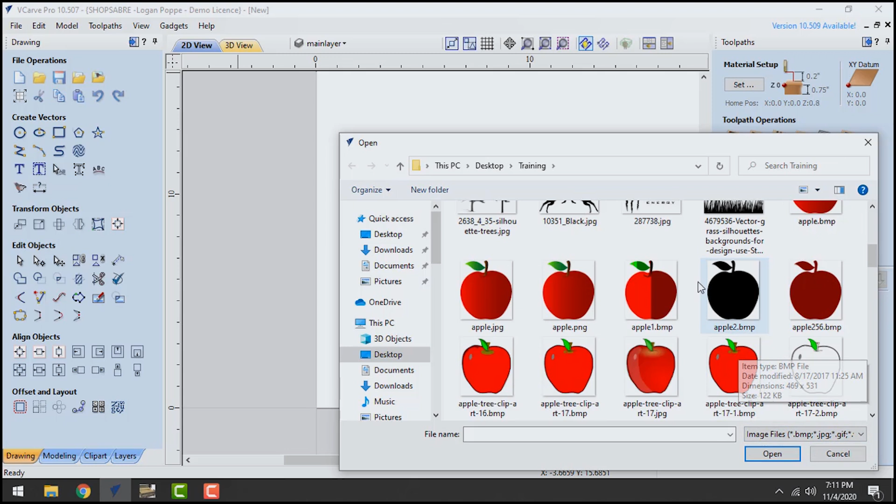So let's go ahead and delete that. The next option is to import a bitmap. And it's not just bitmaps, BMPs — you can also bring in JPEGs, GIFs, TIFFs, PNG files, almost any image file. You can see there's plenty of them that we've called up here. So we can say bring in this blade file, and it appears somewhere on the sheet.

In this case, it's black and white, and ideally that's what you want — black and white gives you the most contrast and is the easiest for VCarve to vectorize. So we can come back to trace bitmap, which we saw earlier, and choose black and white. Even if the image isn't black and white, I typically choose black and white. You'll see why in a few minutes.

We can choose our bitmap fading — as I change this, more things will show up. Same thing up here with the number of colors. If I go really low, we have the actual image, but now we're going to get all this extra stuff that we don't want in here. So sometimes playing around with these slider bars will really help change what's showing up, especially if the image has a lot of noise in it.

There's a noise filter, which is literally the number of pixels it's going to try to ignore. We're going to change this from 1 to 10 — I'll start with 1. Then we come down here and choose Preview. When we do that, it brings up a black vector line that goes around the whole outside and the inside as well.

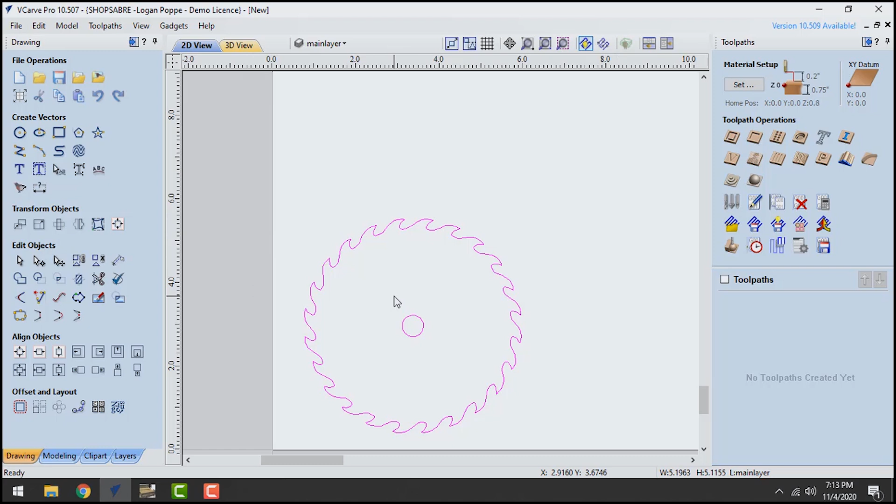We're going to hit Apply, and now that locks it in. We can click on this image and hit the Delete key on the keyboard, and it goes away, and now we have vectors ready to toolpath. In this case, they're grouped, so if we want to make any kind of modification to them, we're probably going to want to ungroup them first. Now we have our dotted lines, and we can put our toolpaths on.

What if there's something a little bit more complicated? Let's say we were bringing in a picture that had color to it — let's bring in this apple. Now this is a much bigger file, and generally when you're bringing in files, you want them to be big enough to have a lot of detail, but not so big that they overwhelm the program.

So typically 2000 pixels by 2000 pixels is a great size to have. If you start getting up to 4000 by 4000, you're gonna run into some issues where it might slow down VCarve. If you go too small, say 200 by 200, you're not gonna have enough pixels to actually get a good image. But we can come back up to the trace bitmap.

That's gonna pull up our different options here. Now we can do black and white. So if all we want is this profile, that's all we have to do. Again, we can change the number of colors, and you can see because of the gradient right there, we're getting part of it cut off depending on how many colors we choose.

Same thing with bitmap fading. We can bring it down to none, and we get our vector line right around the outside. But it's possible that our file might have different colors in it, and we want to keep some of those other features. So in this case, we can only choose 16 colors, and we're going to try to choose all of the colors that we want to keep.

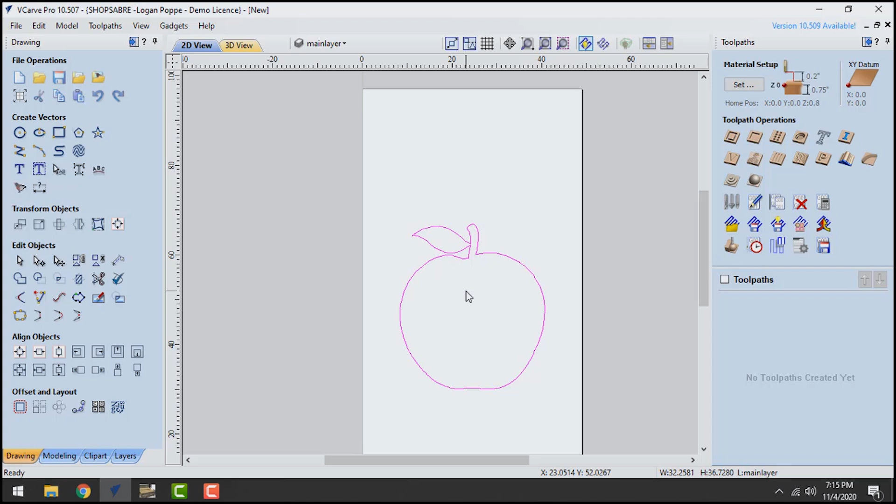Now again, in black and white, you're going to get the cleanest image. So I'm going to click preview and apply, and then go ahead and close that and delete. And now I've got my vectorized image here. You generally do want to delete your image after you've vectorized it, primarily because it will slow down the program, and getting that off there frees up a lot of resources, and now I can zoom in and out a lot more quickly than I was before.

Well, let's say we were going to bring in something a little bit more complicated than that, say this car. Okay, tiny little car file. We can zoom in here, and we've got a lot of colors that don't have as much contrast on here as we might like. When we vectorize, so we can do black and white, and we're just going to lose this light altogether. We can do color, and we can try selecting different colors, and that may get us better options than we had before.

Now in this case, you can see when I select those, there's a lot of noise in this picture. Not too many pixels, so we get a lot of things that are checked, showing up that maybe shouldn't be showing up. So we could vectorize it like this. Of course, we could do black and white as well. Let's say this is what we end up deciding to go with. Apply that. Now, before I delete this image, I want to get this light on the front.

And there's a couple ways I could do that. One way, which is most common, is just to use the create arc. And I'm going to start at the beginning and go towards the center. You want to try and find the inflection points where an arc changes direction. So in this case, here and here, and I can try and meet that as close as I can.

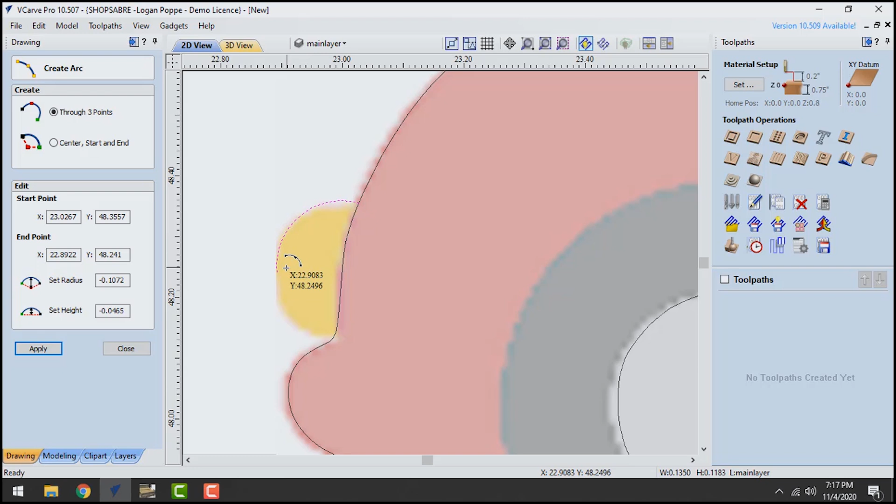Now, of course, I could try and mirror this, or I could simply choose the other side of it and try and line that up as best as possible. I can join these two pieces together just by themselves. And if I want, I can come in here to Node Edit and move this one point if I want to make it bigger or smaller.

I could also change these into a Bezier curve to get handles and try and smooth some of this out. And I can choose whichever arc I want, whichever point I want, and change this one into a Bezier curve as well. And now that's looking a little bit smoother there.

These came out pretty good, but I may also want to decide to stretch these, and I could come in here, ungroup it, and change the node. Or maybe I even just want to replace this with my own circle, just because it's maybe not a perfect circle and I want to get something a little better. I can come in here, draw a circle that's approximately the right size, and just come in here and bump it with the keyboard. Now that lines up pretty well, possibly even a little bit better than VCarve did.

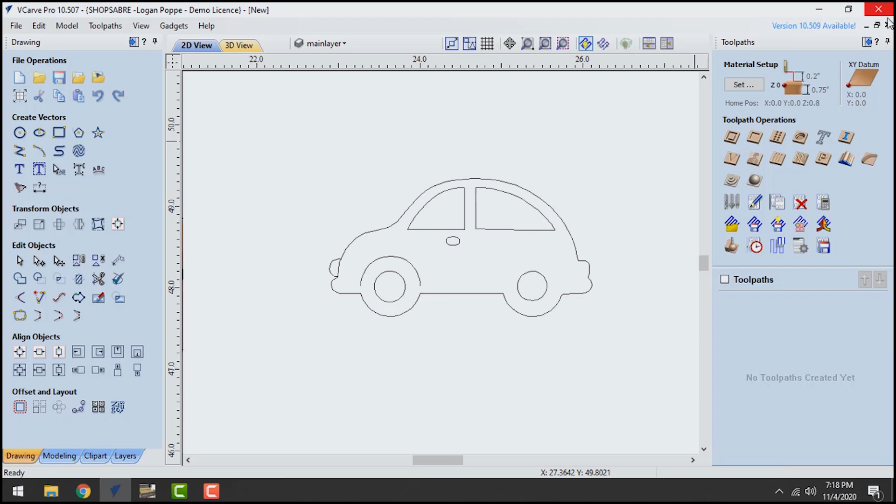And I could do the same thing on the other side as well. Or maybe I even come in here and draw another circle around here, or another arc, depending upon exactly what my design intentions are. When I'm all done, I delete it, and now I have what's left over. Now the other option is to actually import a 3D file. So we're going to come over here, and in this case, I'm going to set it to approximately the size that I want this to be.

I'll click OK and go to Import Component 3D Model. VCarve can't draw in 3D, but it can toolpath and cut a 3D file if it's been pre-made. It's got several options here: STL and Lightwave, DXF, SketchUp, Rhino, a few different options. STL is by far the most common.

You can see here there's two options that we prepared earlier. Teleneck, this is what I'm going to be using, and this is just a guitar neck. Now in this case, it's coming in on its side, so we're going to choose back.

It's going to put it face down, and we're going to set the size that we want it to be. I want it to be proportional, so I want it to be 24 inches long. Center it on the model.

Here's the most critical part of importing a 3D file: we want to change the Z depth, the Z0 plane position. You can see as I move this, it changes what's going to be kept and what's going to be lost. If I have this all the way up, I'm not going to lose anything, but it's also going to be difficult for me to cut this bottom part. If I decide to go all the way down, I'm going to lose everything below the 0 plane. So I could choose somewhere in the middle, but again, I'm going to lose this part of the curve.

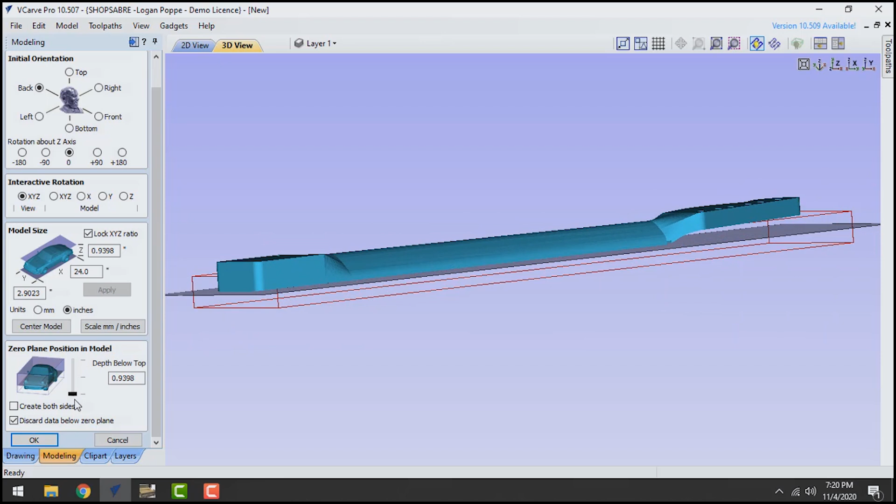So this might be something where we actually have to do two different files and two different sets of toolpaths when it's flipped. And we can potentially use VCarve's flipping function for that, double-sided cutting.

So when we hit OK, it previews our 3D file. This is what it's going to look like.

And we also came over to our modeling tab right here, and we have the option, if we want, to change the scale height, or we can even slice the model into multiple pieces. So say we had a model that was 4 inches tall, but our material was only 1 inch thick. We could slice that into 4 different models, spread that out across our sheet, and then after we cut it out, we could glue it all back together.

Go back to the drawing tab and bring out my toolpath menu. VCarve has two toolpaths that are specific to this type of 3D file. We're going to come to 3D roughing and 3D finishing.

So 3D roughing, when we first click that, it brings up a material setup, and we're just going to confirm that yes, we want 1 inch thick, and our Z0 is on the top of the material. Model is all the way there at the top. And rapid Z gaps, we'll get to this all in just a little bit.

So we're going to choose our first tool, which is usually an end mill. This is just roughing it out, so we want something relatively large that can hog out this area quickly.

These options for model, material, or selected will depend on exactly what we're trying to do. Generally, you can choose material boundary if your material has been shrunk down to approximately the right size of this piece, which is why I changed the material size. You could choose model boundary if you wanted to keep it completely within this shape, or selected vector if we wanted to go back to the 2D view, add in some vectors, and then make it only toolpath within that area. In this case, I'm going to do material boundary because I wanted to cut out this entire area.

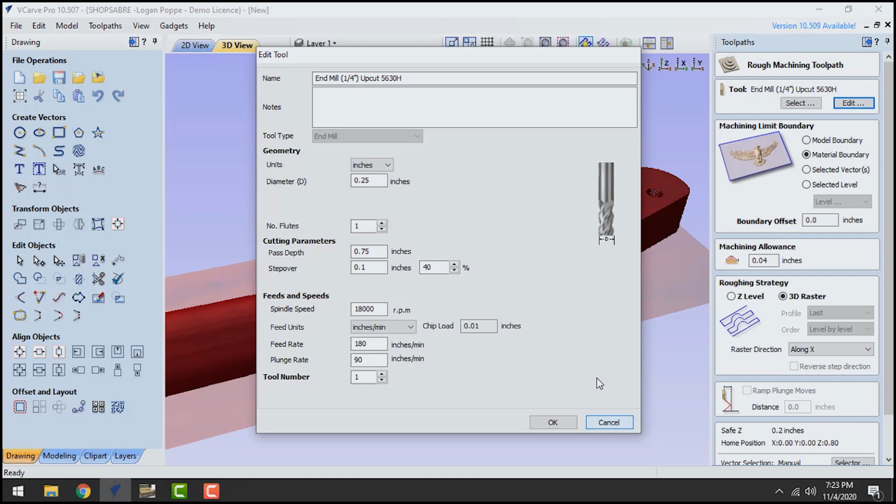So with a roughing pass, we can generally leave it at about 40%, but shrinking that may end up causing us less problems later, when we may not have to do as much on the cleanup tool, on the finishing toolpath. So right here, these are the steps we're going to get. Adjusting our step over will also change how deep it goes during each one of those steps.

Now that we've done that, we can come back and do a finishing toolpath. This is assuming you've already done the initial roughing toolpath, because it's going to plunge our next bit as deep as it has to go to create this model. So we want to make sure both that enough material is removed and that this bit can handle it.

Typically we'll do that with a ball nose. If we started with, say, a 1/4 inch bit that tapered down to an 1/8 inch bit, it gives it a little more strength than just a pure 1/8 inch bit. So that's what we've selected here. Again, we're going to do material boundary and a raster. Calculate that—this one takes a little longer to calculate.

The reason being that our step over for our ball nose should be really small. So let's go ahead and preview just this visible one. And you can see we got a much smoother cut there.

So here's where the trade-off on 3D cutting comes in. If we go back into the finishing toolpath and click edit, our step over is at 10%. Now, the reason it looks so smooth here is because our preview simulation quality is still set to standard. If we had that brought up to some higher number, we're going to see a lot more steps in there, and on the finished product, you're going to see a lot more steps in between.

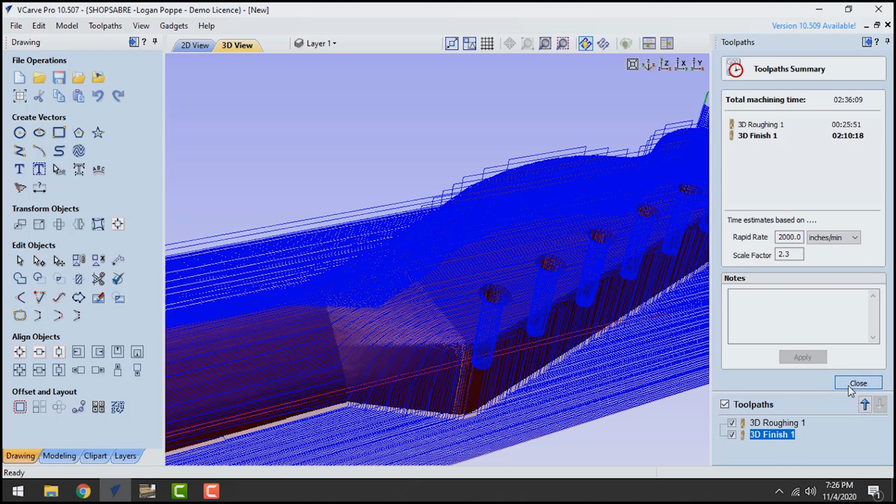Now, one last thing we might want to do when we preview everything here, we notice it's still connected to the material. We could come back and vectorize this just like we vectorized an image before. So we're going to, again, choose black and white, choose more colors, preview, and we have an outline here as well. Apply. And now we can come back and do a profile cut to finish cutting it out.

So we're going to cut all the way through, and we're probably going to choose a different tool because a 1/4 inch bit probably can't cut 1 inch deep. We're going to choose outside, and when we choose outside, that automatically separates inside versus outside toolpaths, so the holes cut on the inside and the profile cuts on the outside, even though we only chose outside.

And of course, we want ramp in, going at least twice the material depth. We can preview that. Now it cuts all the way out, we can get rid of the material, and there's our finished guitar neck.

Now, if we wanted to cut the other side, we would do the same thing with the model flipped the opposite direction. The challenge would be finding a way to line it up when we flip it, so we'd probably leave off that finishing profile cut entirely, that way we have some kind of border we can line up with a jig so we can still reset our zero or keep it in the same spot. Then we'll cut all the way through on the final pass on the flip side.

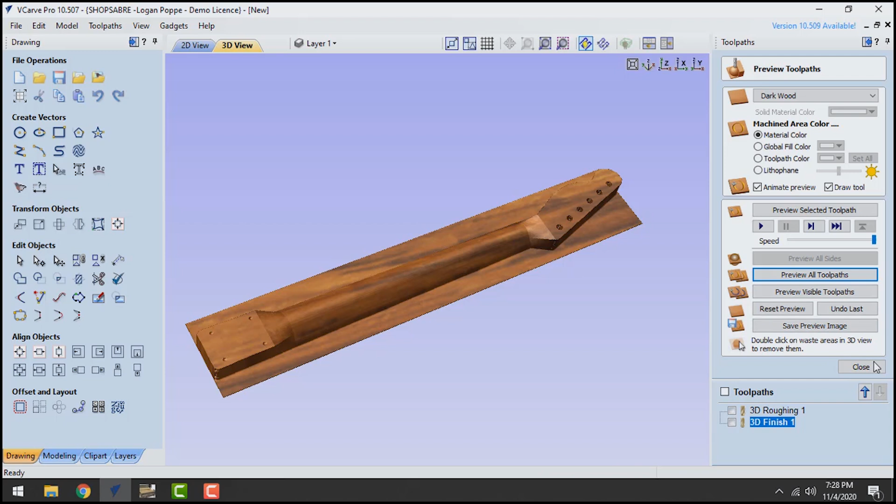Now when we go to save this, we save it just like a normal toolpath. Click Save, and because we have a tool changer post-processor, we can put these all in a single toolpath. Go ahead and save that. And we're all done, and now we can cut it.

The final option for importing is importing other files, say from Photo VCarve. There are other programs that Vectric makes, so you can bring those in and use them as well. Same with the vectors—rather than keeping all of your different drawings in a single file and bringing them onto the plate, if you need one from another VCarve file, you can bring it in and toolpath it and use it again.

There's a few other functions of VCarve I want to go through at the end here, and the first ones are under Edit Objects. So the very first option is to move. Besides just clicking and dragging, which I can do, I can also tell a vector to move to a specific location.

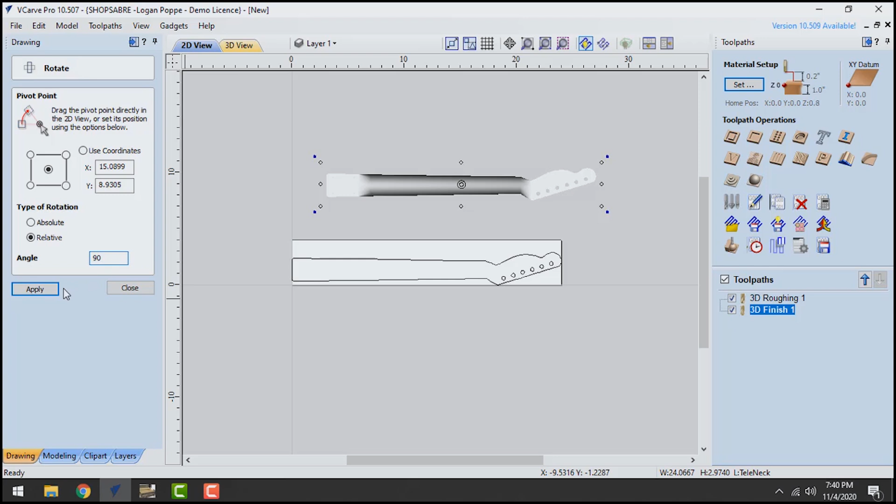I can do the same with the actual 3D part that we've made—I can drag that and move it around anywhere I want. I can do a scale, which we went through earlier, just changing the size of the object. And also rotate—if I want to rotate this 90 degrees, I just hit apply and it will rotate 90 degrees or whatever other number I want. Also, if you click on the image, you'll see these dark squares at the corners, and I can hand rotate using that.

Now, of course, the more complex the part, the slower this is going to go. In this case, this is a pretty complex part, but if I choose just these vectors, it's going to rotate pretty smoothly.

There's also a mirror tool, which we used earlier for the drill, but there are other options here too—you can rotate horizontal or vertical. If I uncheck Create Mirrored Copy and rotate horizontal, it's just going to flip it right in its center axis, right there. Same thing with vertical. And of course, I can flip right or left, which flips it around this bounding box. And of course, I can flip about a line as well.

I also have options for distorting objects. I can potentially draw multiple lines up and down and have it distort between those two lines. I can choose if it's a single curve or multiple curves, and right now it's saying I don't have any other curves selected, but it'll try to twist and distort those lines to fit the geometry to the main line.

Down here, there are some other tools that are used a little bit less—there's weld tools: weld, subtract, and overlap. They're kind of like the interactive trim. So let's say I just go ahead and get rid of all these, and put a couple parts on here.

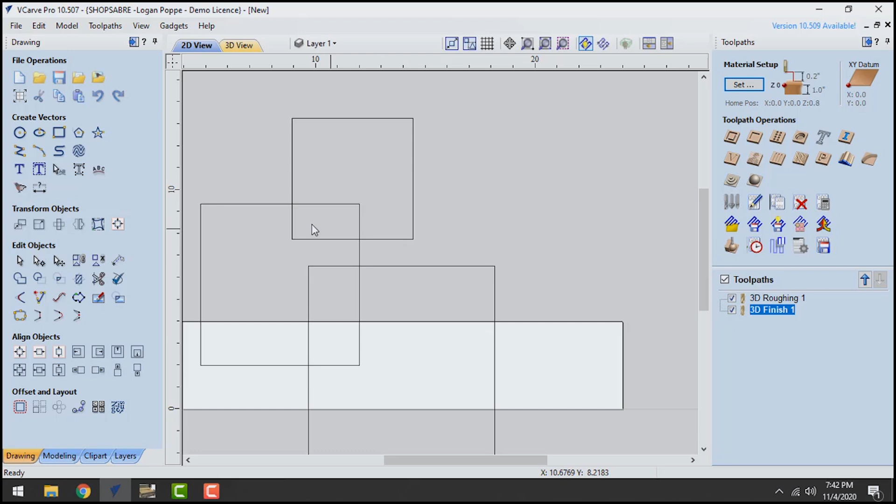And I want to carve out this middle so they all share the same inside. I can use the trim tool and just draw straight through there. Every time I undo, it undoes one level. But I can also select everything and do the weld option, and that gets rid of any shared insides at all. So that makes it really quick, really easy, if that's all you want to do.

But I can also do a subtract. When I do that, it's going to leave only certain pieces, and the pieces it leaves remaining are based on the order that you select things. So if I choose this one, then this one, then this one, it subtracts in a different order than if I choose those in a different pattern. If I choose the center one, then the bottom, then the top, it's going to go in a different order, or in this case, the same order.

Sometimes it's different. If I grab the whole thing just using VCarve, just a selection box, I guess it's doing the same thing. Sometimes it'll do different options, different orders, like that. So I selected all three of them and it shows them in a different order, which is why I tend to use the interactive trim first, because it will choose them in the order that I want them to be chosen in.

We also have the option of overlap. So if we have something that's common to all the parts, it's going to keep them. But again, the order that you select them will change things. Maybe I want both this one and this one, or just this one. That's where the trim really comes in handy.

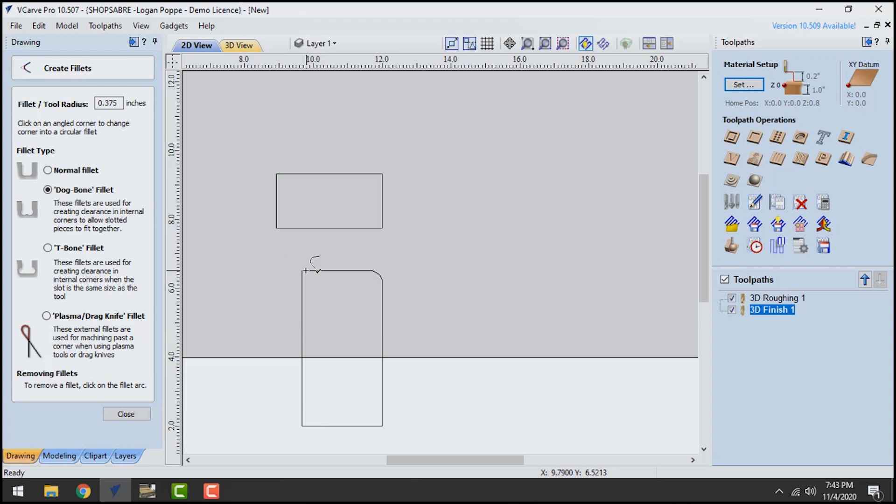The other options down here are fillet. So if I wanted these to be rounded corners, I can choose a normal fillet of a certain radius and just click on each corner that I want filleted. But there are other options here too, like dog bone and T-bone, and plasma. So if you have a plasma machine, you can also use VCarve for that. There's a totally different post processor to use, so when you're saving it, you save it with a different post.

But I can always do those after the fact. Now if I wanted the inside curves like I had before, I would maybe have to come back here and use the trim tool to get rid of those, and now I have that inside fillet.

The next tool is the extend tool. If I have two lines that are separated, I can use the extend tool, and based on which side of this line I'm choosing, it extends it in that direction. Then when I choose the other one, it will not only extend them together but automatically trim them, so I don't have to do any other work at all.

And there's another similar tool, if I draw two more lines, which is the join close. So if I grab both of those and join close with a straight line, it just puts a straight line going between the two. I can also join close with a curve, and it does its best to put an arc in between there. Or I can join close by snapping the two points together.

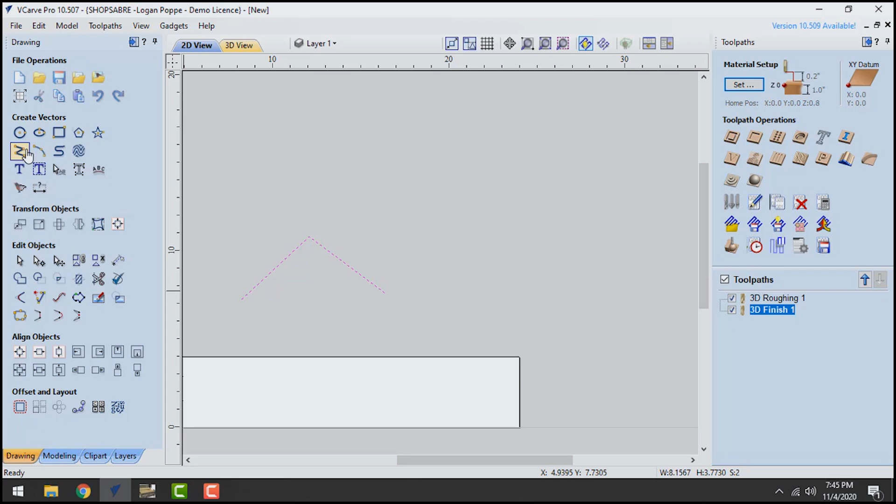There's also a curve fit. So if I have a part that I've imported and traced, but it doesn't come out very smooth, maybe I have a lot of very small jagged lines going across it, I can use this curve fit to try and fit a smooth curve to this. Depending upon the size of the part, I may have to change this tolerance. Normally you're going to be in a very small tolerance like 0.1, 0.01. In this case, I might change that to say 5 inches, and it's going to smooth them out just because I have a pretty big part. That will tend to create a smoother curve so you don't get a lot of back and forth when importing parts. I can cancel it and back out as well.

There's also a measurement tool. So if I want to measure what the gap is here, I can see either the distance, in this case it's 8 inches between these two parts, or I can come down to a span, and if I click on one, it tells me what that span is. In this case, it's 5.4 inches long, but if I add both of these together, the total vector is 10.6 inches long. Because it's an open vector, it just says open vector, so there's no area to be shown there.

Also down the bottom here, we have a circular copy and a copy along vectors. So if I have a circle tool to use, and I want to place that circle a certain number of times along this line, I can do that here. Copy object, and I can say I want 7 of them, or I can say I want a certain spacing between them, and we're going to say copy, and it's just going to fill them out across this whole shape.

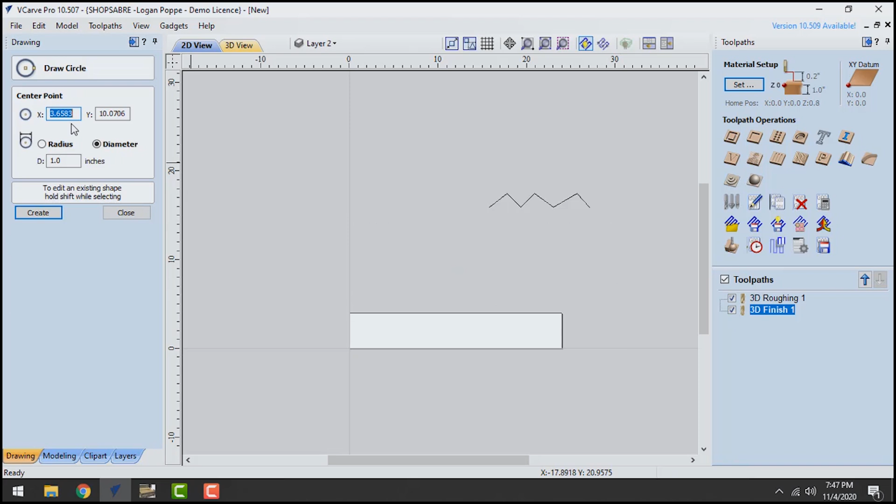And that's really useful for making flanges. We can make a flange very easily if we put a circle, say it's center, and make it 6-inch diameter. Maybe we want a center hole at say 1-inch diameter. And then if we want circles to loop around, say at 3 inches out, we're going to put in 3 and put the circle where we want it to start.

Now we can use these two, and the order that we select them determines which one gets mapped around the other. Come to copy along vectors, again tell it the number of copies we want, and it fills them out.

Now if we had an even number, one thing to be careful of, when we hit copy, it's going to place that last one on top of the first one, and we're actually going to have 2 separate lines here. We'll see that because if we click this and hit delete, we still have a line there. Now if we hit delete again, it goes away. So that's one thing just to watch out for if you're doing even numbers of things.

But there's also, if we back out of this and get rid of all these, there's also a circular copy. So you can create an array of that many parts. You just tell it where you want the center to be, in this case 0, 0, and we want 12 of them. And we can copy them and it just fills that out. So I wouldn't even necessarily have to have that center line.

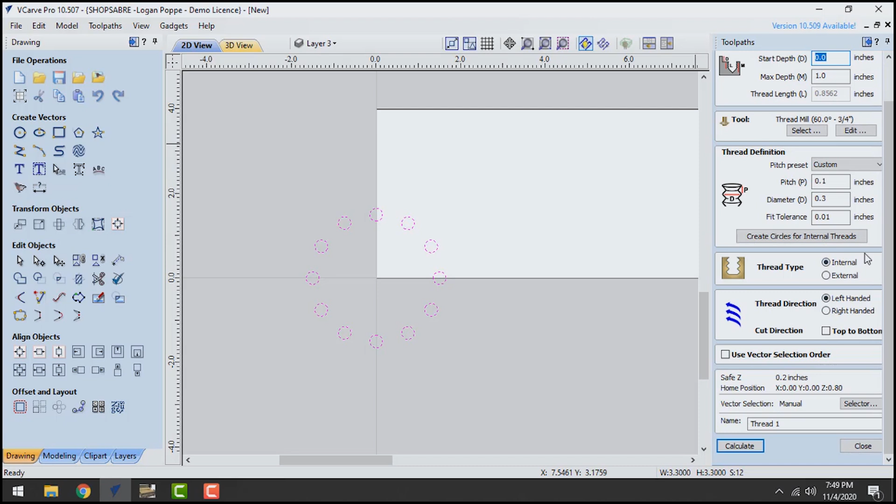Now on the other side, we have the toolpath menu, and there's a few remaining toolpaths. Starting with version 10.5, they added thread milling. This is going to be very specific based on the thread milling bit that you get. But if you have a bigger hole, something like a 1-inch or 2-inch hole that's maybe too big to run a tap through, you can buy thread milling bits specifically, fill out all this information in terms of the start depth and the end depth, thread length, pitch and which direction you're going, internal or external, and it'll end up creating that thread for you.

We have a quick engrave function, and that's basically if we create a shape and we want to just hatch fill that very quickly, we can hit calculate, reset this, and it's just going to create a very quick hatch fill without doing any extra work. So it makes it really easy there.

Our inlay toolpath is used a lot for signs. So if you have two different parts for the sign, you have the outside part and the inside part. Maybe the inside's acrylic backlit, and the outside's aluminum. You can use this inlay tool.

So maybe I have this here, and this text tool, this draw text, lets me fill in text within a box, and as I type, it fills it in and keeps it inside that box. So let's say I wanted to type ShopSabre there, and maybe the ShopSabre part was going to pass through, and then this border was going to be made out of a different material. Well, I could just toolpath this with two different toolpaths, inside and outside, profile cuts. But the problem there is that the inside cuts are going to have a rounded edge because the bit is round, but the outside is going to end up having a square edge.

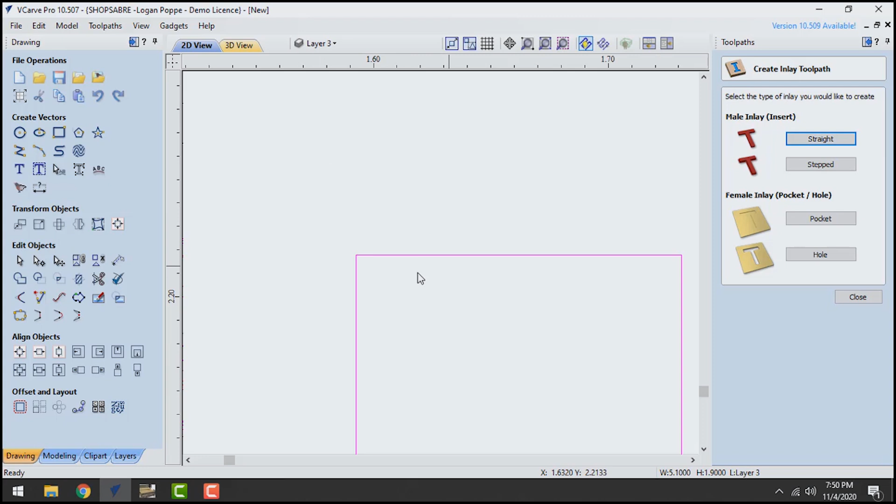So what this toolpath has done, this inlay toolpath, it's brought both of those into a single option. I have a male inlay and a female inlay, and I can choose which one I want. It's going to automatically round those corners, and you can give a tolerance as well, say an allowance offset, so it keeps enough gap there where you can slide the parts in between without having to grind them down or sand them down first.

And if we choose the stepped option, it also gives us an option around the edges to create a little step where that letter will no longer slide all the way through the part, it'll stop at the back. And if we have these joined together close enough, it may just create one big step all the way around, so we keep it as a single piece.

Another option that's new with 10.5 is photo V-carving. That used to be a completely separate program that Vectric made, but now they've integrated it into VCarve.

If we bring in another part here real quick, let's actually bring in a bitmap. We're going to choose this duck - that's a good example. We're going to bring this over here, and put a vector on it.

Before we do that, we're going to come over to our photo VCarve. We're going to give it the maximum carving depth, how far it's retracting, and what bit we're using, then either raster or hatch fill. To calculate that, we have to select the bitmap first.

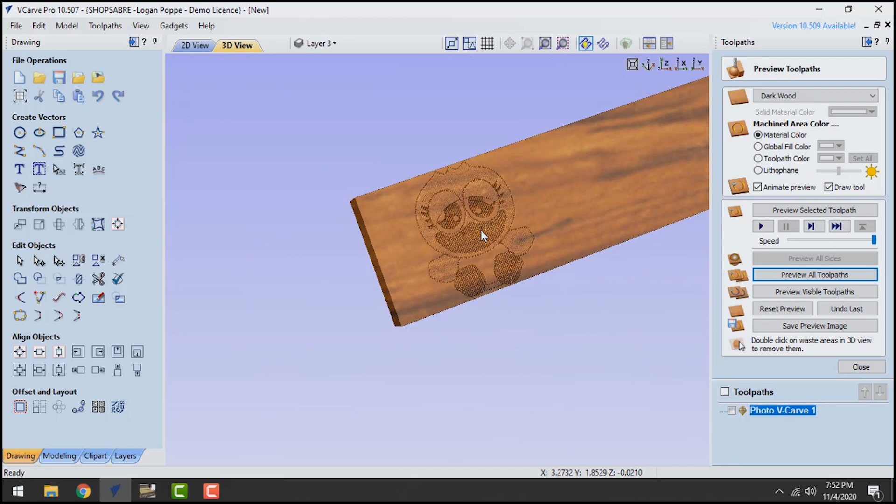And we're going to preview all. Now this is going to change based on how the light hits it - if the light hits it one way, it'll be real dark, and if it hits the other way, it'll be real light. That's a really simple way to get a quick carving there. You can see that won't even take all that long, 20 minutes, and you get that nice image.

Now, of course, I can vectorize this as well, and depending upon the contrast, you may end up seeing some of these little areas in here. In this case, the rest of this seemed to come out pretty smooth, but perhaps down here is where I'd take the arc tool and come along to smooth it out.

Another option is the fluting tool. So if you're doing flutes on columns, you can make a ramp that gets deeper on one side, starting on one side and literally diving deeper as it goes along, or creating different shapes you can see right here. That's not used quite as much.

What's really taken it over now is the molding toolpath. What we can do is make two different paths - we have to get out of this tool first. Let's say I want something that's an arc across here, and I want that to go across this whole distance, like this.

Let me go ahead and delete this toolpath here. I can choose my molding toolpath and choose these two options, and you can see it puts one of them along the other. The order that you select these in is going to change which way it gets cut. Now in this case, it's saying cut depth exceeds thickness.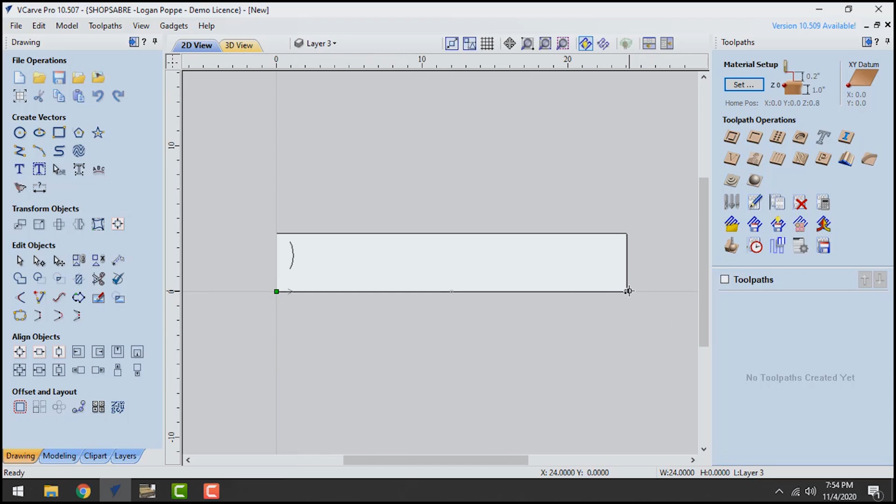What we can do is come into node edit mode here. If we close out of this and come into node edit mode, we can change the direction that these go. You can see the green is the start point. We're going to make start point and select these in this order, then calculate. Now in this case, it's saying that it can't fit the entire toolpath across there.

So that's going to be based on the order that we're selecting these. Calculate - now it's going a little bit too deep, but that's okay for this. Reset and preview, and it's going to end up cutting in a circular motion. Now let's redo that - I want something... that's why. All right, I'm going to start over with it.

All right, so let's say I want this arc, and I want it to be spread across this whole face, or some part of this face. I'm going to draw the length that I want it to cut along, and the profile that I want it to take.

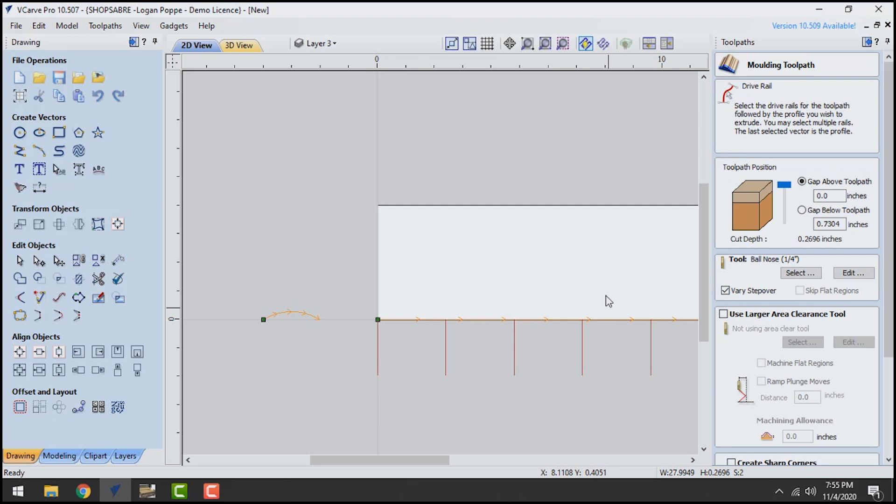And the order that I select these determines which one gets placed across the other, which direction it cuts. So if I choose the length and then the shape, it's going to profile cut this way. If I choose it in the other order, it's going to try to wrap this long line across this arc. Now in this case, because it's going the wrong direction, we want to change which direction it's starting from.

We can come into the node edit mode, change our start point, and go back into our toolpath, selecting these in the appropriate order. Now you can see it's going to cut that way. We choose our tool, which is usually going to be a ball nose, calculate, reset and preview. Now we have a nice curve that goes along that path.

That one is really handy for anything from door moldings to making bowls. Anything that needs a curve that can be symmetric works really well for creating a 3D file from.

There's also a texturing toolpath. So if we get rid of this, we make just a nice box here. We want to put a texture in, maybe something that looks similar to wood grain. We're going to come back over here, texturing toolpath, select our box, choose our tool, and all these different options here will change how it looks.

There's a couple of defaults, so let's just say default. We're going to choose calculate - this might take a minute depending upon the size of the shape you're creating. We'll reset this and preview all. Now you can see it created a nice little bumpy texture in there, and it's a little bit different than this vector texture. If you play around with this just right, you can make it look like real wood sometimes.

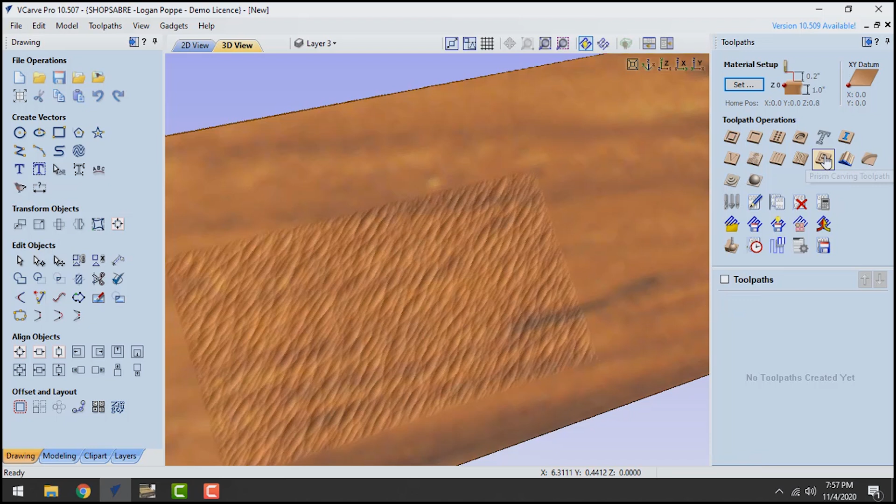There's also a prism carving toolpath. Let's say we wanted a circle like this. We put a prism on it and calculate that. In this case, it's saying we have to go deeper, so it may not work quite as we wanted, but we're going to preview that. This is what a prism toolpath does—you can see it puts angled lines around any lines that it sees.

So if I had wording on here, say the word prism, it's kind of like a V-carving toolpath. Let's grab that there. We'll recalculate this prism. It creates these little prismatic shapes. So if you wanted just, say, a raised letter P that kind of met at a point, you could cut all the way through it with a V-bit and get just that P all by itself.

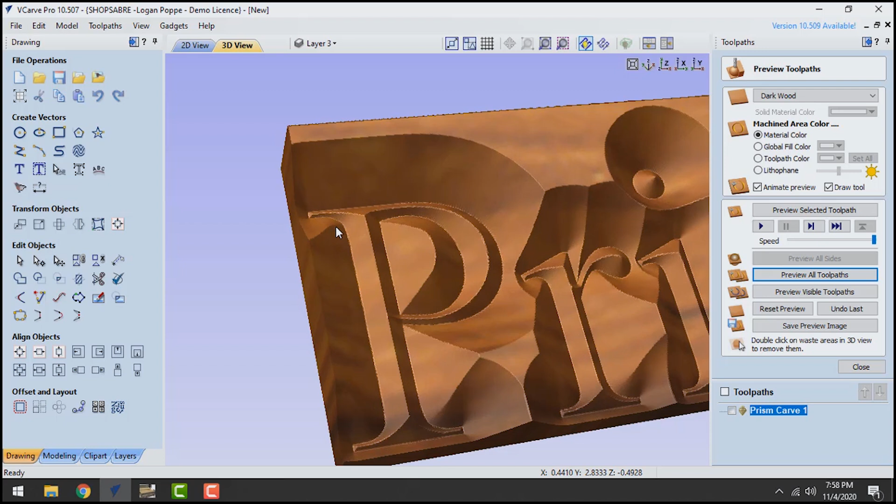There's also the option for chamfer, and that's new in 10.5. Before, you had to go up to the gadgets section to do a chamfer, but now it's just a toolpath. I can create a line and tell it I want a chamfer at whatever start depth, whatever bit I'm using, and the angle, cut depth, and width—inside or outside. Then I can calculate it and it does a chamfer with those settings. In this case I did a pretty small chamfer, but it will slowly carve down one direction or the other based on how you set it up.

Also here is the tool database, which needs to be set up when you first get your machine and all your bits. You're going to program all these bits in here. You come down to add a tool, and whichever section I'm in, that's the section it adds it to. So I can add an end mill—maybe I have a 3/8 bit made specifically for aluminum, so I can type aluminum, or come up to ball nose and put it in the name rather than the description. Now it'll show up out here. Give it the diameter, the number of flutes, and create.

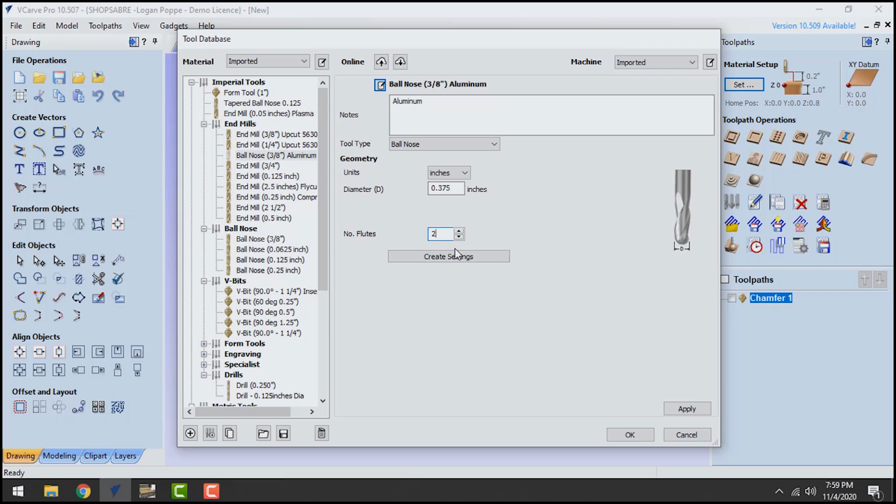I can lay all these settings out as the manufacturer recommends, and this is something you want to talk to the manufacturer about because every bit manufacturer is different. Some manufacturers will have a chip load for the exact same size and type of tool that's half as much as another manufacturer, so you may have to go half the feed rate—that's really important to know. This chip load is a combination of the feed rate, the spindle speed, and how many flutes you have, and you want this to match what the manufacturer says.

Plunge rate is almost always half of whatever your feed rate is. And if you have an automatic tool changer, you want to make sure that tool number is correct. If you don't have an automatic tool changer, you can have them all as one and it won't matter.

You can also create groups of tools down here. So if I have a 5-position tool changer, I can have 5 tools that go in as a group when I'm doing wood signs, another 5 for aluminum, and another 5 for a braille sign. I can keep those as groups together, copy them, and import them. So if I have multiple computers with VCarve on them, I can import and export those, and of course I can delete what's already there. All right, so I can hit OK.

The one big thing if you have a tool changer is you want to make sure those tools match what's on the machine. Although the machine itself may not care what tool is where—if it calls for tool 3, it's going to go grab tool 3—you want those tools in the correct spot so it grabs the correct tool.

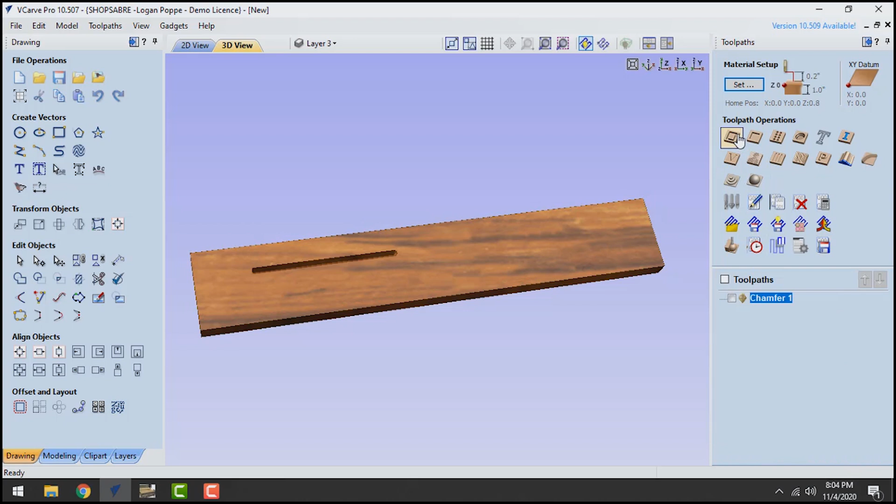Plunge is the distance above the material that it's going to start moving at the plunge speed. So it's going to rapid down at full speed until it gets to the plunge depth. Then it will start moving at the plunge speed that we programmed in to our toolpath down here in the plunge rate, which is usually half the feed rate.

A few other random things in VCarve here, we have guidelines. So if we just grab and click on one of the rulers, we can pull those out. We can put them wherever we want. We can right click on those and change the angle that they're at. And again, we can grab them around, move them around. We can click and drag off the sheet, or we can right click and just delete the guideline altogether. But if we have parts or drawings that we're making, we can snap directly to that guideline.

The snap tools are up here. If we toggle these snaps off, then let's say we have another part, it won't snap to those endpoints at all. But if we turn them back on, we can snap directly to them.

There's also some zoom tools. If you don't want to use the mouse wheel, you can use these different zoom tools here to zoom to the whole plate or some section that you click and drag a box for.

And gadgets are things that you can add into VCarve, and you can download those from the Vectric website. You do have to make sure that you're getting ones that work with your version. There are specific versions of the software, and Aspire, which is VCarve's big brother, has some gadgets that won't work with VCarve, so you have to make sure you get the right ones.

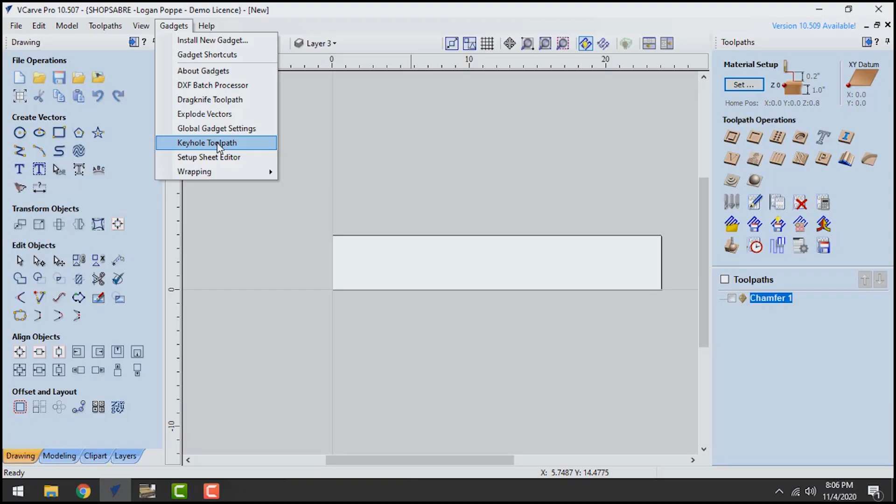There's also an explode gadget. So if I have some shape, but I don't want the rest of these, I just want to click on that top line, I can explode it. It'll ask me if I want to replace and put them on a new layer. In this case, I want them on the same layer. And now when I click on one, it's separate from everything else.

There's also a wrapping toolpath, which is less necessary now. Starting in version 9.5, they added double-sided machining, and one of those versions also added rotary toolpathing. So if you have a fourth axis, that's all now built into VCarve, where you just tell it the length and the diameter, you draw on the flat, and then it rotates it around. You just have to make sure that you know which direction along the X or the Y that it's facing.

For flipping parts, I recommend referring to VCarve's video on double-sided machining. They do a really good job at showing you the dowel method so that when you flip, those dowels stay in the same spot. The pop-up reference pins on the machine aren't necessarily accurate enough when they have material hitting them all the time. Sometimes they can move just ever so slightly out of position. For a normal file that you're cutting, that won't matter at all. But when you're flipping the part, being off even 1/1000th of an inch could cause an issue. So using that dowel method is really the best option. You just have to make sure you specify which direction you're flipping it.

Once you choose a double-sided file, up at the top you have toggle bottom and top side. So when you draw something and then flip it, it's going to make a very light gray outline, and the rulers are going to change color so you know that you're on the opposite side. And this is what we drew on the other side. Now if we draw on this side and flip back and forth, it shows it like that, and the toolpaths disappear because the toolpaths are side specific.

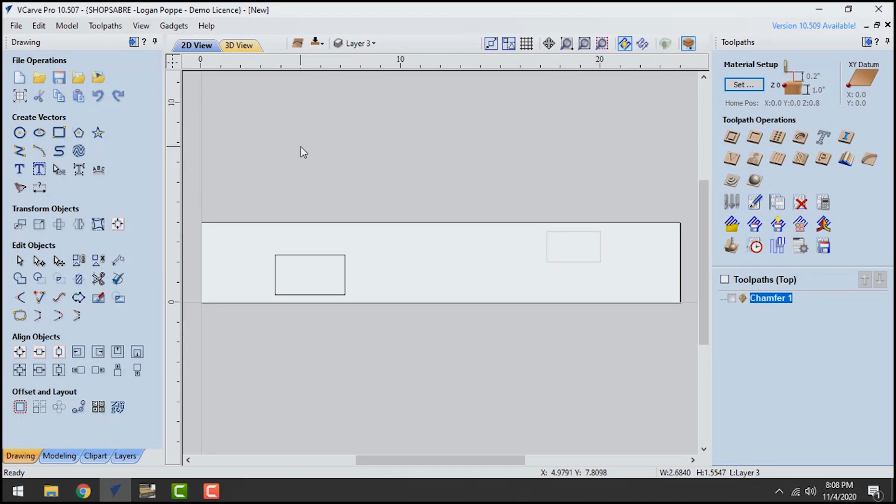All right, to wrap up this video, I figured I'd take you through some of the maintenance items that you can expect to keep the machine running in tip-top condition. Every machine is going to be a little bit different depending upon the number of bearings and ball screws or rack and pinion that you have, and the other options like a vacuum pump might also play into it as well.

So to start off, I figured I'd bring you into our manual, and in Chapter 2, the very last section is lubrication. So here, it shows 3 pictures on the bottom and talks a little bit about what you can expect in terms of how many grease points. Most machines, like Pros and ISs, are going to have 16 grease points. You're going to have 12 linear bearings and 4 ball nuts that go around those ball screws. All of them have to be greased roughly every 40 to 60 hours of runtime.

But the most important thing is that there's a small amount of grease on the rails at all times. If it's completely dry, you may want to increase your greasing schedule. If you're getting grease coming out of the seals of the bearings or ball nuts, you're going to want to pull back on that, or you could have a clog, which you may clean out with some WD-40. If you're doing that, spray some WD along the rails, run the machine back and forth. That'll remove all that old grease, and then re-grease it with the new grease.

So typically 1 to 3 pumps on most ball nuts every 40 to 60 hours. But if they're completely bone dry, some of those ball nuts can take 10 to 15 or more pumps of grease from empty. So just be aware of that.

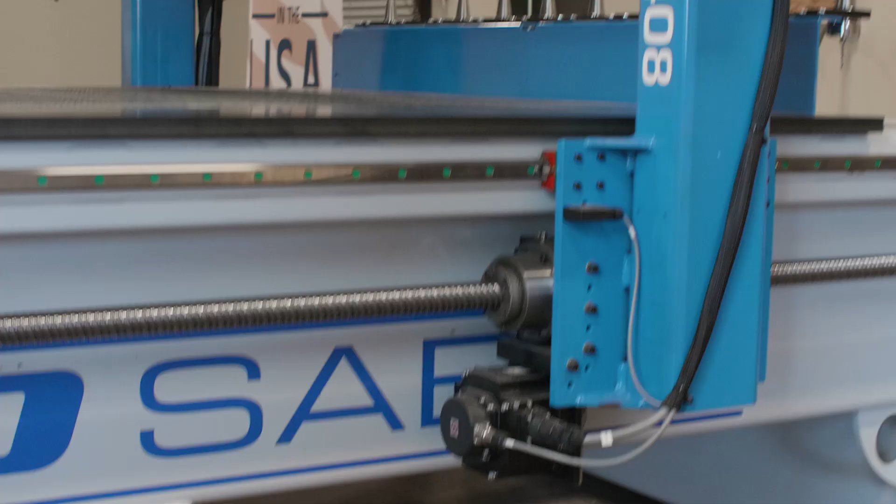If you grease it while it's in motion, it'll start moving grease out the back of the nut or bearing. So while it's in motion, you can pump until the grease comes out the back and you don't have to worry about blowing out seals. If it's stationary, those seals could blow out if you pump too much grease into them.

A good way to get it in motion if you're by yourself is to move it to the back of the machine and hit the home button. As it's coming forward or to the left, you can stand there and grease it as it goes along. If you have someone else there to help, put it in slow motion and have them drive it while you grease it.

If you have an RC machine or a 23, it'll be a little different because you only have 3 ball screws on a 23, and you may only have 2 bearings on the Z-axis. The ball screws on the 23 don't have zerks on the ball nuts, so you just lay a bead of grease right along the screw and you're good to go. Same thing with the rack and pinion on an RC series or Sidekick series—just run a bead of grease along the teeth and you're good to go.

Make sure you use the needle fitting when greasing those. A standard grease gun may get stuck on those zerks, and if you pull too hard, it can pull the grease zerk out of the bearing, since they're just threaded into plastic, and then you have to get a new bearing. If you use the needle fitting, you can push it right up against the check valve at the end of that grease zerk and pump grease in.

If you get grease coming out between the needle fitting and the grease zerk, you don't have a good enough seal. If it's coming out of the seal, that's too much grease. But again, greasing while in motion will help with that.

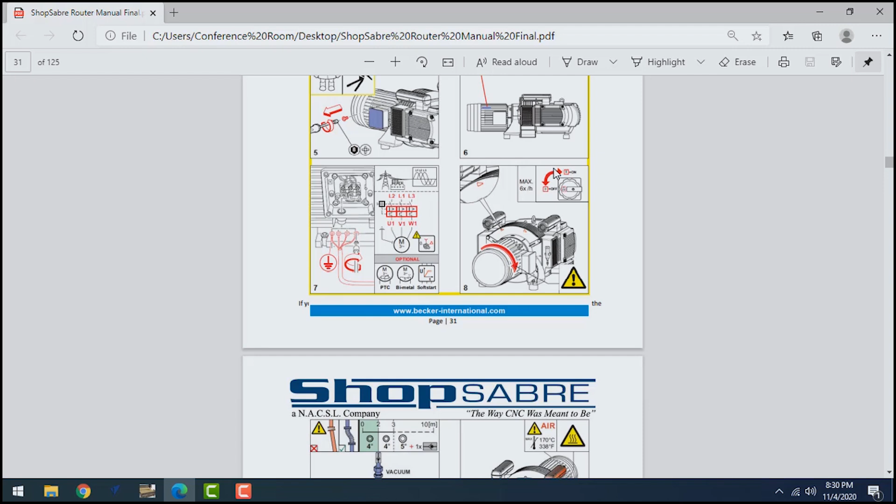On the Becker, there's also a small amount of grease you'll want to apply, which comes right with the Becker. About every 3,000 hours, this special grease should be put in there, and you'll also want to check the blades on the Becker motor itself to make sure they're the correct size.

In this video, we went through all the features of the controller and actually running the machine, getting it set up to cut, going through all of VCarve and getting that first part out to the machine, then actually cutting on the machine, and through all the maintenance you need to keep the machine running for a long time. I hope that really helps you get out there and make your first part.